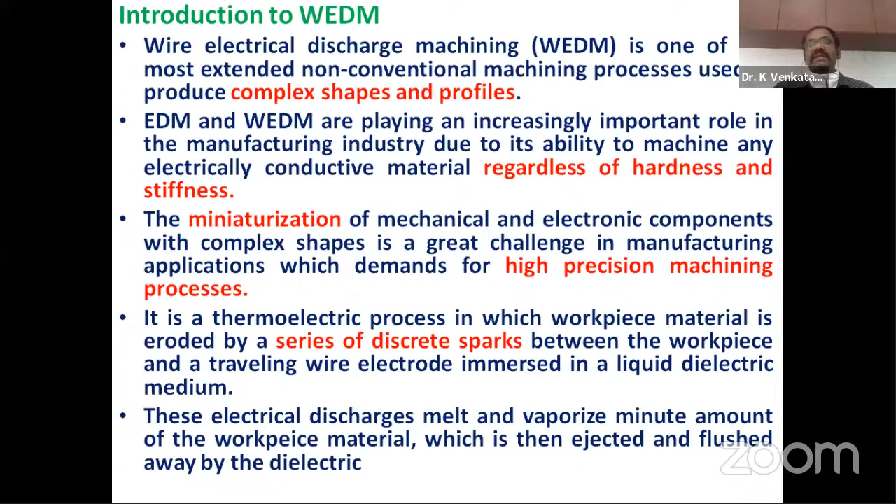Here you can see the workpiece is held on the CNC table. Generally, wire EDM is performed on CNC machines where the workpiece, that is the work plate, is moved in X and Y direction as per requirements by the CNC machine.

The table can be moved in X and Y direction as per the profile of cut we want to make. During the machining process, according to the specifications and dimensions of the profile, the CNC program will be written, and the table is moved with respect to the wire as per the program.

Bottom is called as take up roller.

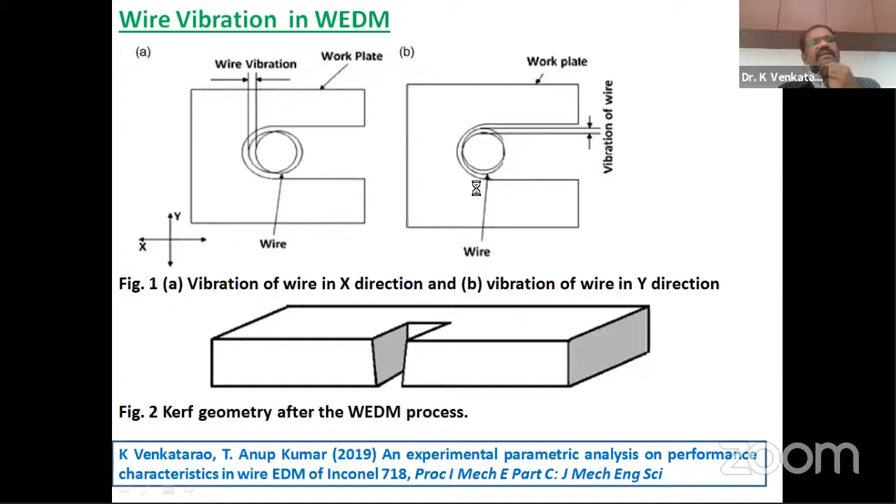Wire tension is a very important thing. As I told you in this slide, vibration of wire in the x direction promotes the metal removal rate, while vibration in the y direction changes the kerf width and affects the surface roughness. To reduce wire vibration in the y direction, if you increase the wire tension, the vibration amplitude, the displacement of wire, can be controlled in both x and y directions.

But the thing is, in wire EDM the diameter of the wire is around less than 0.5 mm. Sometimes, in the present study, we used a diameter of around 0.3 mm, that is almost 300 microns. You cannot even physically see that wire, that is the diameter of the wire we are using. The wire tension can be kept up to 18 newtons.

If you give maximum wire tension, when the positive ion strikes the electrode and spark strikes occur, the wire will break. When the wire is cut, the total machining has to be stopped, and again the wire has to be cut and set to the take-up roller. Those are the problems. That's why you have to reduce the wire tension.

If you reduce the wire tension to avoid cutting of wire due to sparks, then there is a tendency of wire displacement. That is the problem. So that is why we model the wire vibration to reduce its effect on the kerf width and the surface roughness.

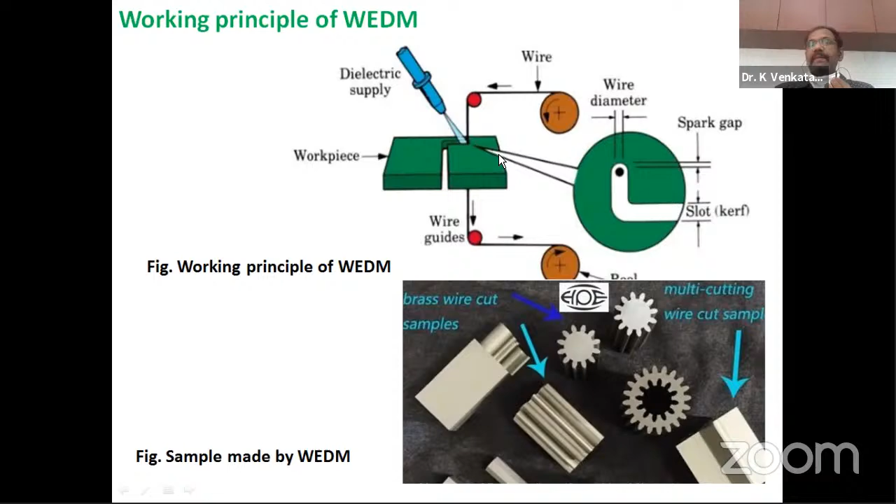Now, to study the effect of wire vibration in x and y direction, first of all we have to measure the displacement. I request all participants to please listen carefully from now onwards. It is required to study the effect of wire vibration on the kerf width and surface roughness, so we have to measure the wire displacement in x and y direction.

So in 2016, Habib Samesh and Akira published a paper in the Journal of Material Processing Technology. The reference is mentioned in the slide. They made an attempt to measure the displacement of wire along with frequency in x and y direction, using a digital high-speed video camera, model Keyence VW-6000.

They used this camera to measure the vibration of wire in x and y direction. A camera we generally use captures 23 to 26 frames per second, but this video camera is able to capture 8,000 to 23,000 frames per second. That camera is able to capture the wire, and its cost is around 18 to 22 lakhs.

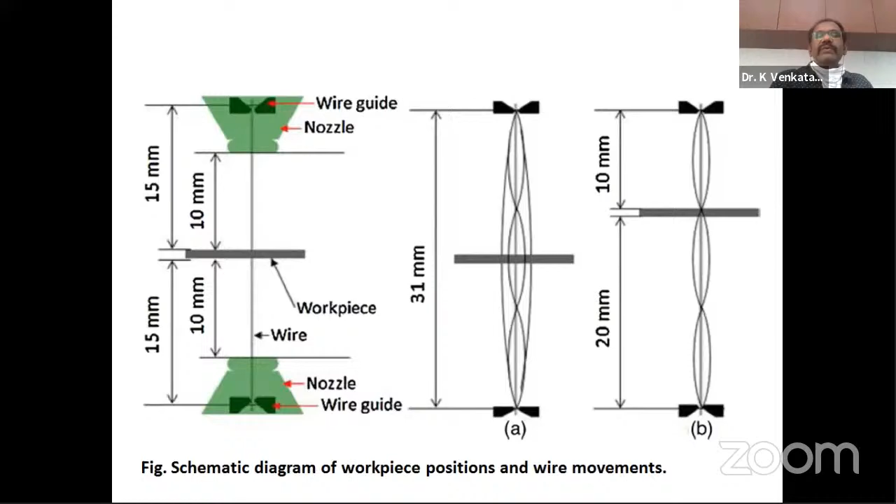With respect to time, we get synchronized results of the wire vibration in X and Y direction. Now it is possible to use this data to analyze the effect of wire vibration on kerf width and surface roughness. Before using that vibration data, let us see the modeling of the kerf width and surface roughness.

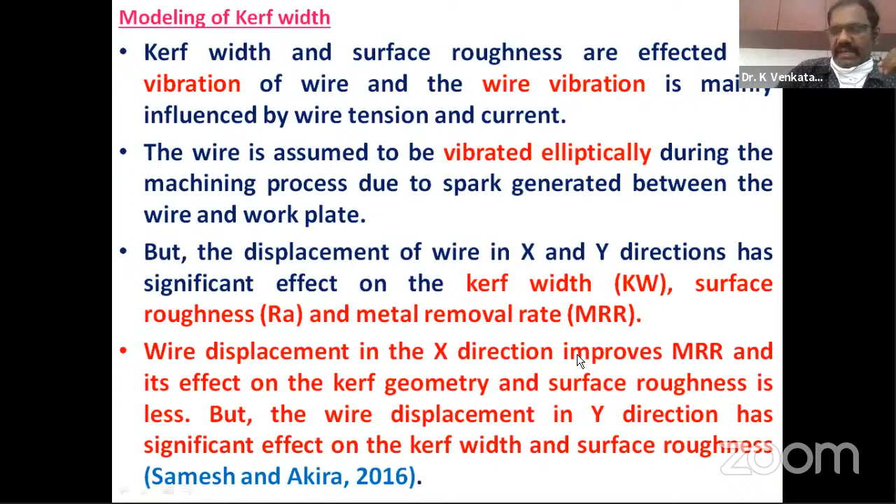We know it follows an elliptical path, not a circular path. In elliptical path, the wire vibrates. That I will show in the next slide, how it vibrates in the elliptical path. The displacement of wire in X and Y direction has a significant effect, as already told. Displacement is nothing but the amplitude of wire vibration. In X direction it promotes more metal removal rate, but its effect on kerf geometry and surface roughness is less. The wire displacement in Y direction has significant effect on kerf width and surface roughness.

Now if we see where that is, we can measure the displacement of wire in X and Y direction using the accelerometer. So not only the displacement of wire vibration, but that accelerometer also measures the frequency of wire vibration and the amplitude of wire vibration. With what frequency it is vibrating in X as well as Y direction, the data can be collected with the help of the accelerometer.

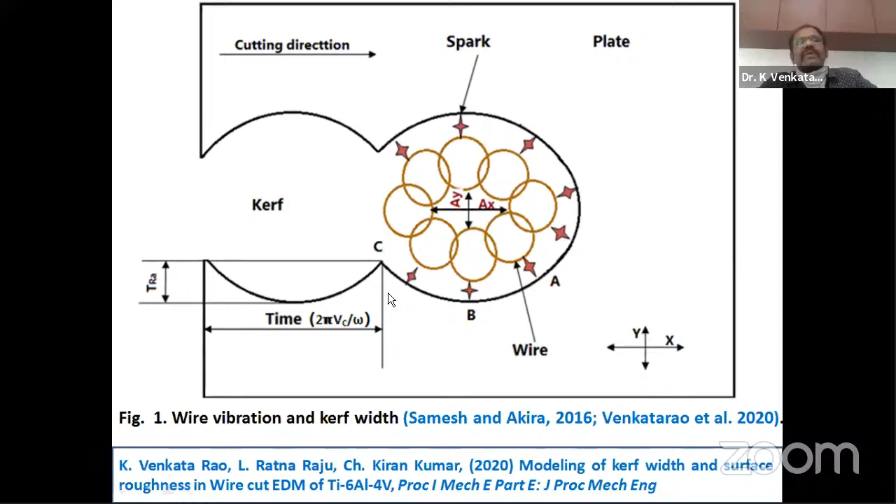Now you see the modeling of kerf width. In the before slide also, we are showing A, B, C. So that wire is vibrating in this direction, moving from A to C through B. That is what we have to assume, that in an elliptical direction it is vibrating. That is why it is moving from A to C through B.

As the wire is assumed to vibrate elliptically during the machining process, the surface roughness and kerf width are modeled using the amplitude and frequency of wire vibration in X and Y direction. The workpiece is fed against the wire electrode, and the wire starts machining at point A to point C through point B.

So the thing is, at A you have the maximum height of the kerf, and at C also you have the maximum height of the kerf. We want to find out the time between A and C. If you are able to estimate the time instants at A and C, then you can model the kerf width and surface roughness using the vibration of wire in X and Y direction.

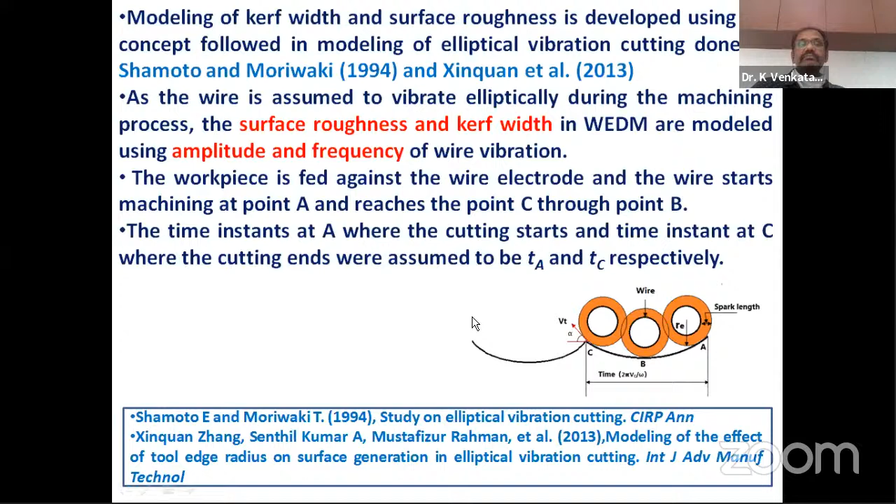So in the next slide, you see this. Here, AX is the amplitude of wire vibration in X direction, AY is the amplitude of wire vibration in Y direction, and the position of wire during the machining process, in terms of X coordinate and Y coordinate, can be modeled at a particular time instant.

Xt is equal to AX into cos omega t minus VC t. VC is the cutting velocity during the machining process. Nowadays we have all CNC machines, and on the display you will get the value of VC. There is no problem with the cutting velocity; on the display you can directly record the cutting velocity during the wire EDM process.

So now with the accelerometer, we can measure the wire vibration in X and Y direction in terms of amplitude and frequency. Using that frequency in equation number 3, you can find out omega using the frequency of wire vibration. Then we can model the position of wire in X and Y direction.

In the next slide, we see velocity of wire; we should know the velocity of wire, then only it is possible to model this. The velocity of wire in X and Y direction can be obtained by differentiating the previous equations 1 and 2. Then the transient velocity in X and Y direction can also be estimated using equations 4 and 5.

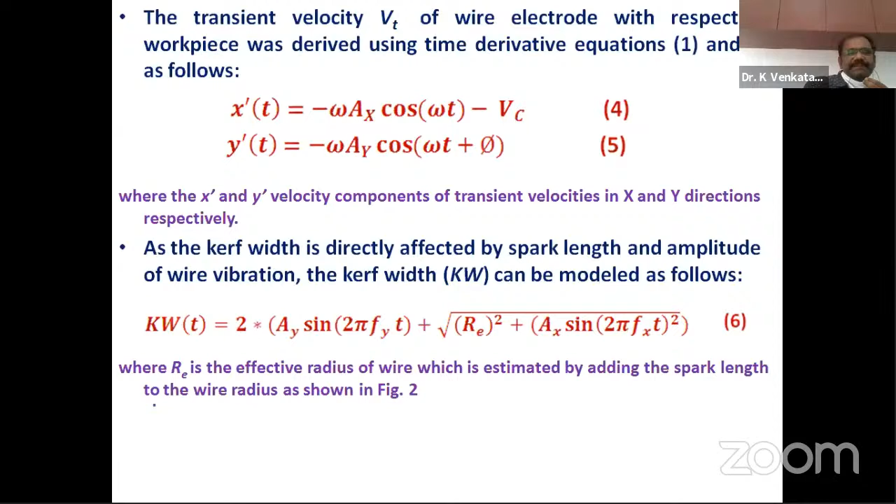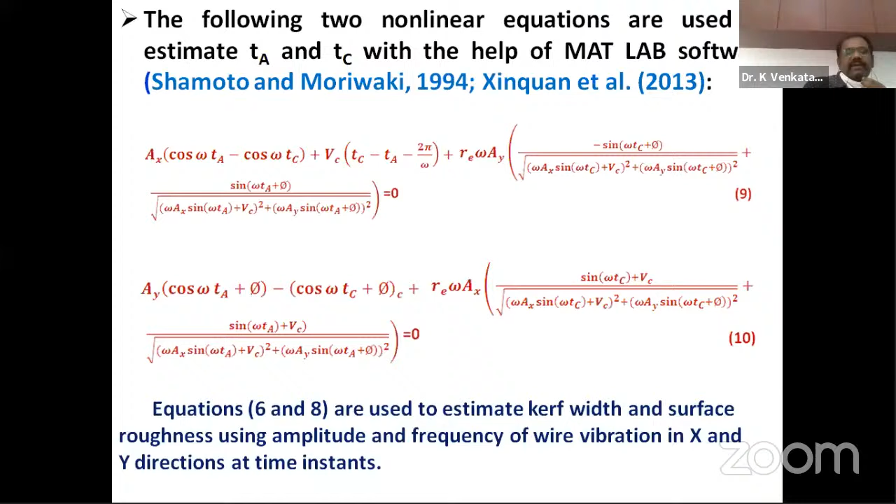Using TA and TC, the theoretical roughness and the theoretical kerf width, both things at a particular time instant, can be estimated. This is called modeling. In modeling, we can estimate or predict the kerf width and the surface roughness. Like that, we can estimate kerf width and surface roughness using the experimental data of wire vibration, that is amplitude and frequency of wire vibration in X and Y directions.

This is the experimental setup already explained. Next, the experiments conducted at different parameters: the workpiece material, wire material, distance of wire guides from the plates, above the plate 100, below the plate 100. The plate thickness is 5 mm, total gap is 205 between the two guides, that is the total length of wire. Deionized water is used as dielectric fluid.

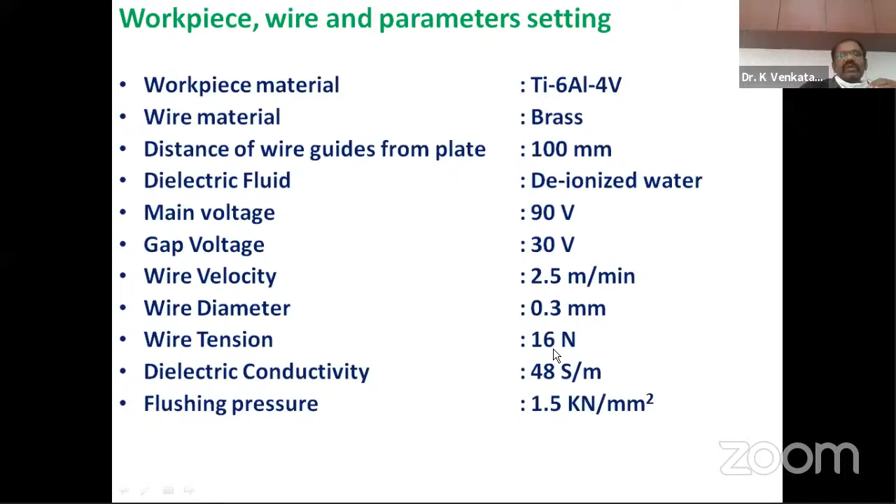Voltage is taken as main voltage 90 volts, gap voltage 30 volts. Wire velocity, wire diameter 0.3 mm. Here we took the wire tension as 16 newtons. All these are the parameter setup.

At different working conditions, these are the experiments we conducted. These are 4 input parameters we have taken: current I, wire tension, T-on, T-off. This is the output value we can directly record from the machine using the thickness of wire and current, thickness of the plate and cutting rate. We can estimate the metal removal rate. AX, FX, AY are measured using the accelerometer.

Kerf width is predicted using the equations we developed in the study. RA is also predicted using the model we developed. Experimentally, under the machine vision system, we measured the kerf width and roughness simultaneously. When comparing these two, both were found to be very close together.

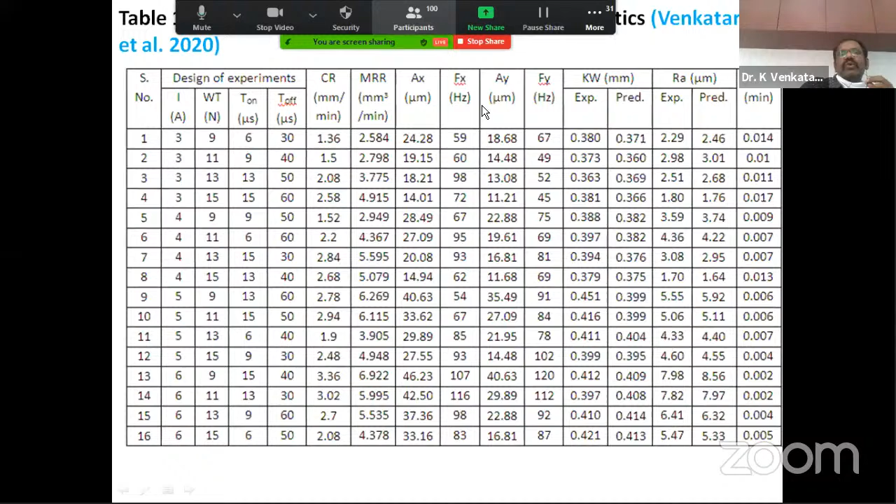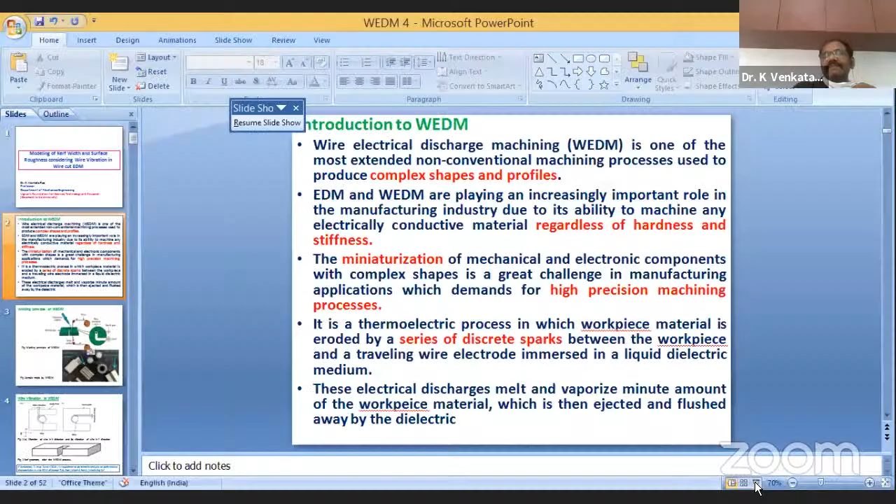This TA value is obtained using the equations shown just before. Using equations 9 and 10, we can estimate the TA and TC values.

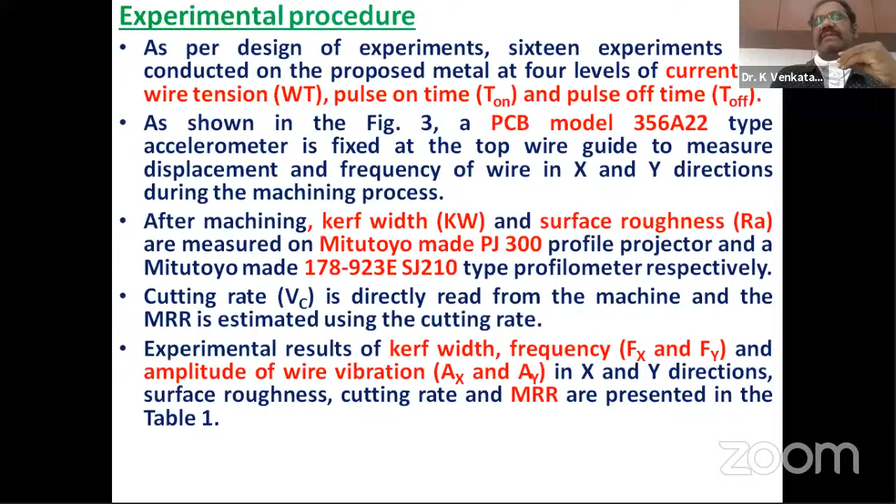Now this is the variation of wire measurement in X and Y direction. In X direction, the maximum amplitude is 24.28 micrometers with a frequency of 59 Hz. In Y direction, the maximum amplitude is 18.68 micrometers with a frequency of 67 Hz. So this shows the measurement of wire vibration in X and Y direction directly.

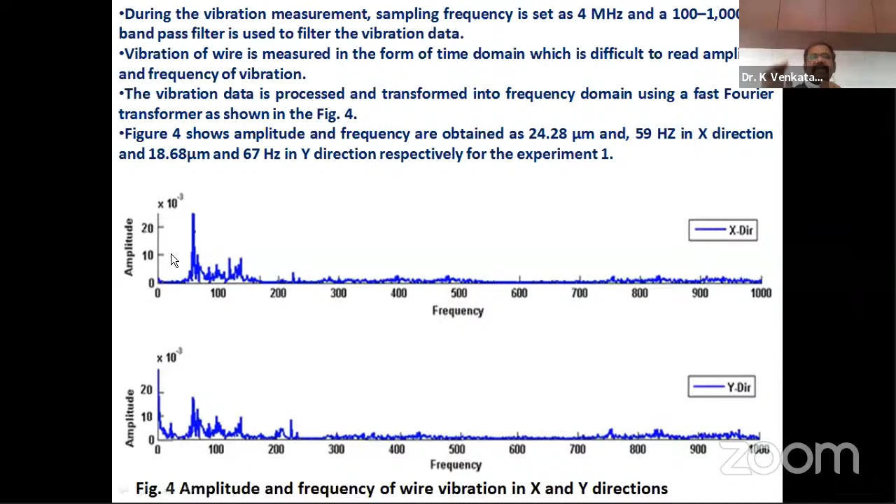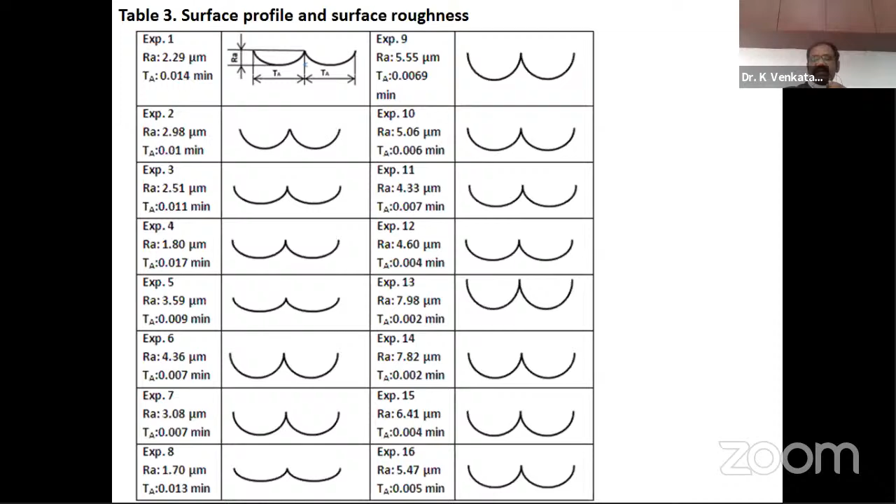Current and wire tension have 74% and 23% contribution respectively on the displacement of wire vibration in X direction. In Y direction, both current and wire tension contribute, but wire tension has more influence than current on the wire displacement in Y direction.

That's why we want to optimize the process parameters to reduce the amplitude of wire vibration in X as well as Y directions. So now we have almost completed the mathematical modeling. Now we go for the optimization.

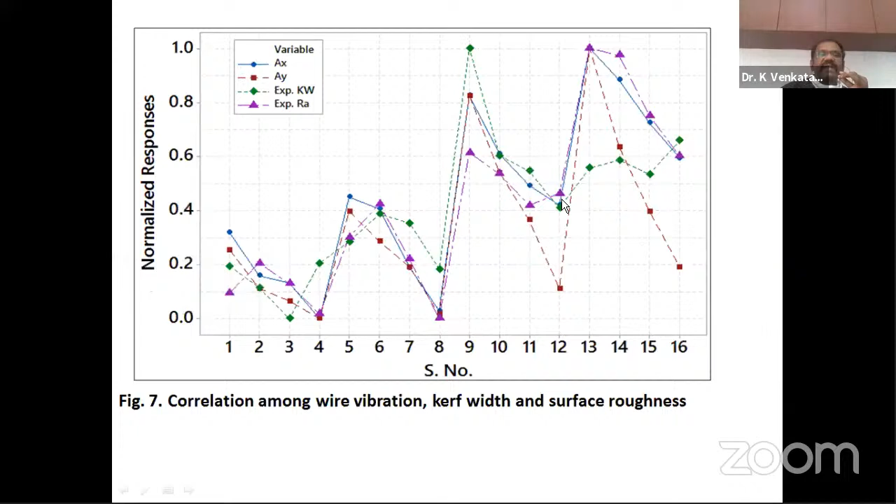There are different types of optimization techniques, like the Taguchi method, which everybody knows. Next is response surface methodology, gray relation analysis, particle swarm optimization, teaching learning based optimization, graph theory matrix approach, and utility concept. Now this is very important.

All participants are requested to listen carefully about the advantages and limitations. First I am talking about the limitations in all the methods, so we can select one method as per our requirements. First let us see the Taguchi method.

In the Taguchi method, design of experiments can be carried out, and the Taguchi method estimates the signal to noise ratio for all the output characteristics. Signal represents the required value, noise represents the unwanted value. When the signal to noise ratio is more, the unwanted value is less, and the results will be good.

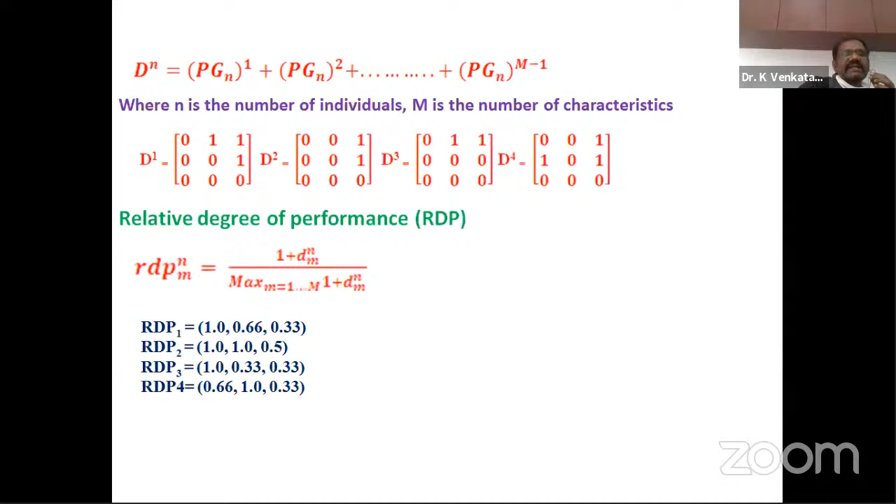This one: 0.66 plus 1 plus 0.33 plus 1, this one is 2.99. So 2.99 by maximum value 3.66. If you add all these things, you will get 1, comma 0.8169, comma 0.4071. So this value we get from this one.

Weights are to be estimated. So in the estimation of weights, first you have to add these 3, so one value will get, that is 2 point something value will come. 1 divided by that value, you will get 0.449, and this divided by sum of these 3, you will get this one.

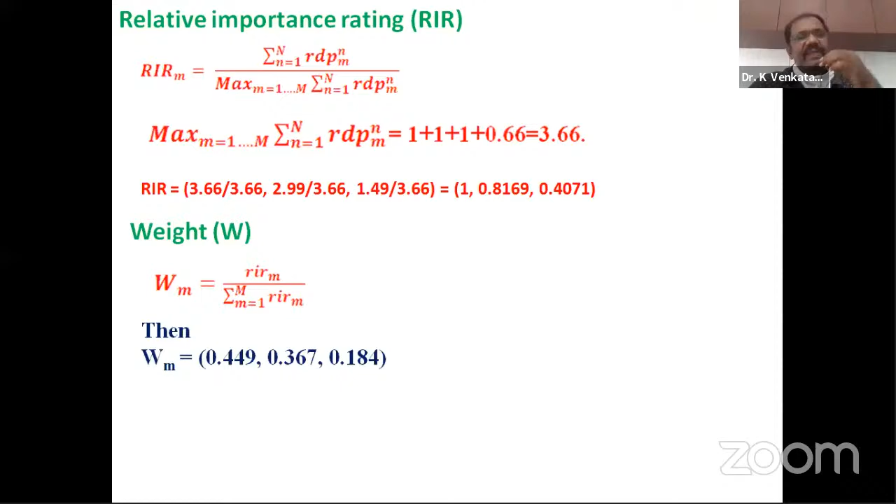So like that, scientifically we can estimate the weight of responses. If you see the RSM method, it is not possible to give weights there, so all the 3 responses will be given 0.33, 0.33, 0.33. Like that it gives the weightage there. In this method, we can estimate the weights scientifically. Weights of responses are estimated scientifically.

How to get the multi responses into one response? Generally here we have the CR, AX, AY, these are the 3 responses. 3 responses are to be converted into one response. So how to convert that one into one response, I will show here. See this one, overall utility value, it is nothing but the 3 responses converted into one response, that is called the utility value or maximum response.

See this one, weight of AX, weight of CR, weight of AY. So this one is PAX, this is preference scale, again we have to estimate. This PAX is preference scale, this one also preference scale for the CR, this one is preference scale for the AY. Here you need not worry how to estimate the preference scale easily, I will tell you, please listen to me.

Now you come here. So this one is construction of preference scale, where we have the 3 responses AX, CR, AY, and for this we have the Taguchi method. Using the Taguchi method, AX you have to select as larger the better. All of you know the Taguchi method, I think most of you know. Using the Taguchi larger-the-better method, because AX and CR have to be maximized.

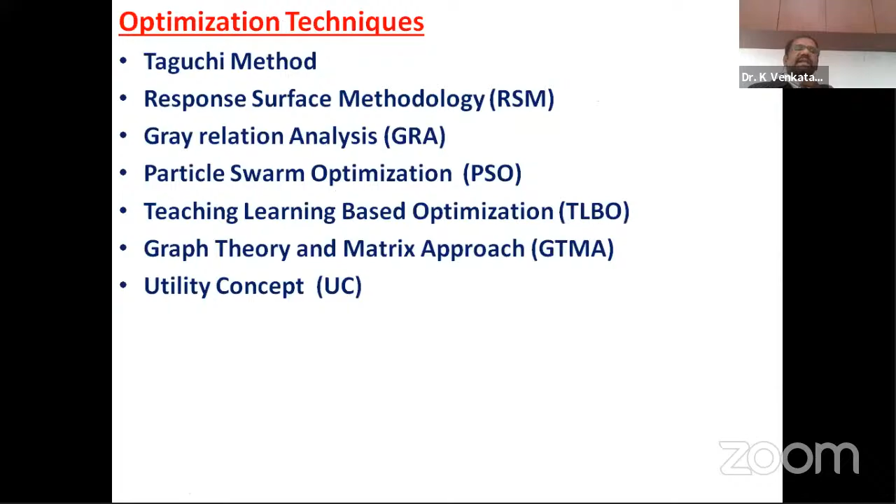Now, if you go to the experimental results, in the present study we have taken CR, AX and AY. We want to maximize CR and AX, and minimize AY - that is the aim of our study. These values, clearly see these values we are using.

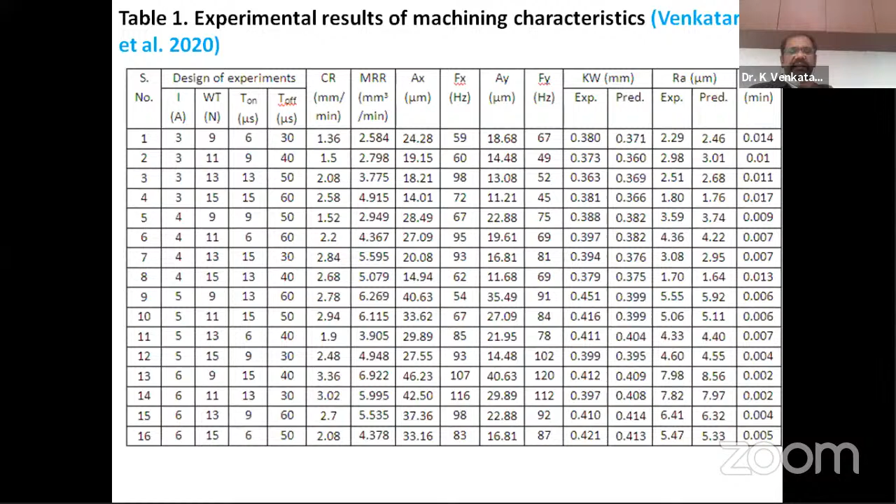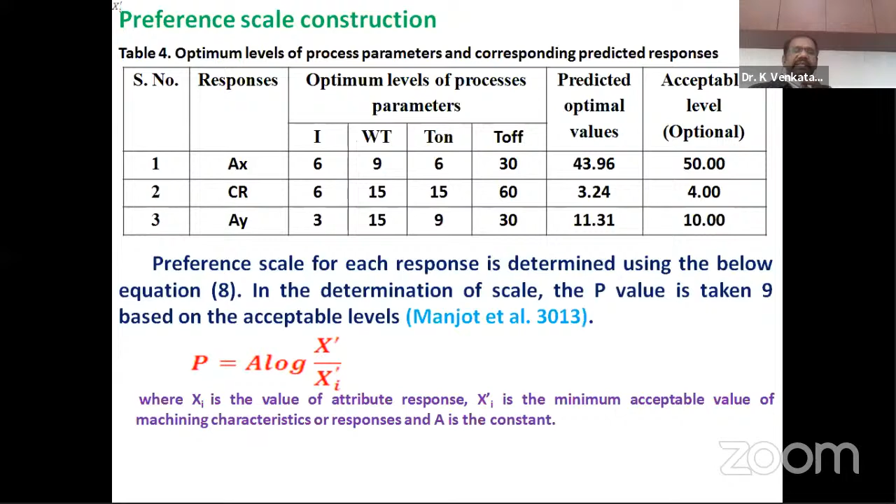How many experiments did we conduct here? 16 experiments we have conducted. How to estimate that utility value, I will tell now. Listen carefully - so far I think there is no problem for you to understand. Now see this, overall utility value.

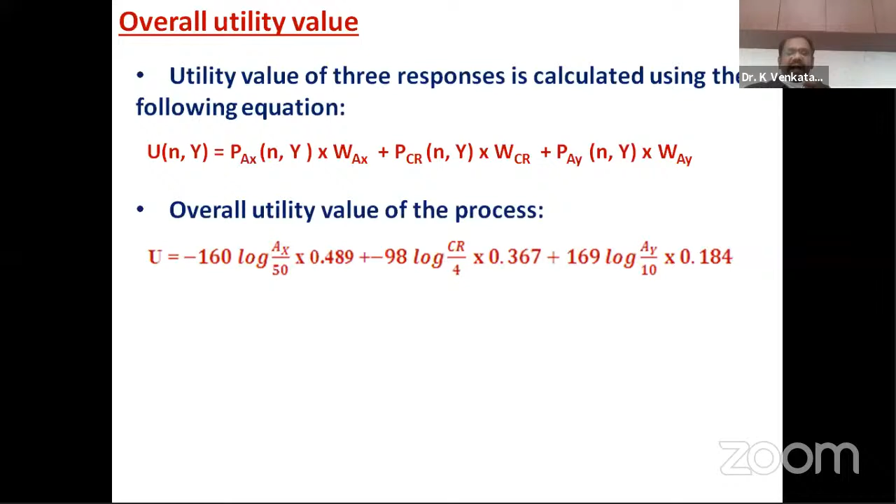That means the three responses are combined and converted into one response as utility value. See this, W - these weights we have obtained using the GTMA method. All the weights are taken, and preference scales also, just before this slide we constructed. See this, AX, CR, AY - where you have 16 experiments, in each experiment you have separate AX, CR and AY values. Those values will be taken, and finally you will get the utility value. See this, on the right side you have a column, the utility value taking the three responses.

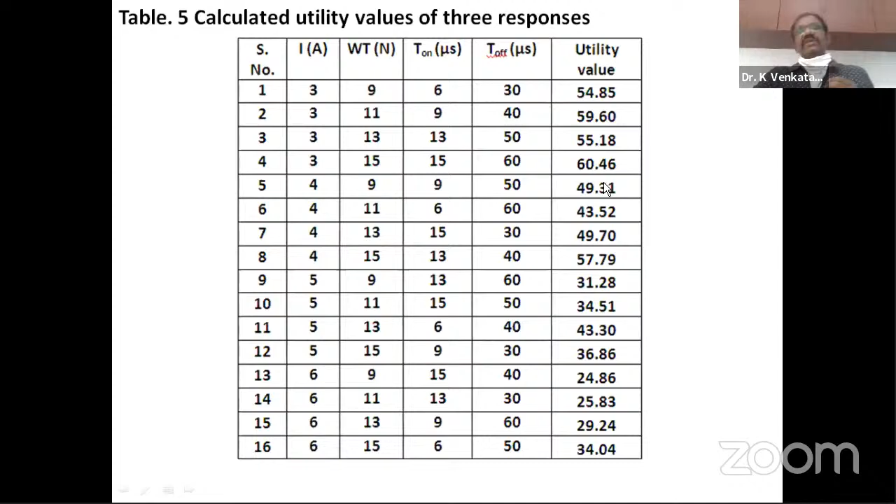So using these utility values, the process parameters are optimized. So we get optimum current that is 3.697, wire tension is 15, 7.6364 is the T-on optimum value, and T-off is 60. So we optimized the process parameters here - that is 3.697 current, wire tension, T-on and T-off. So we optimize the process parameters.

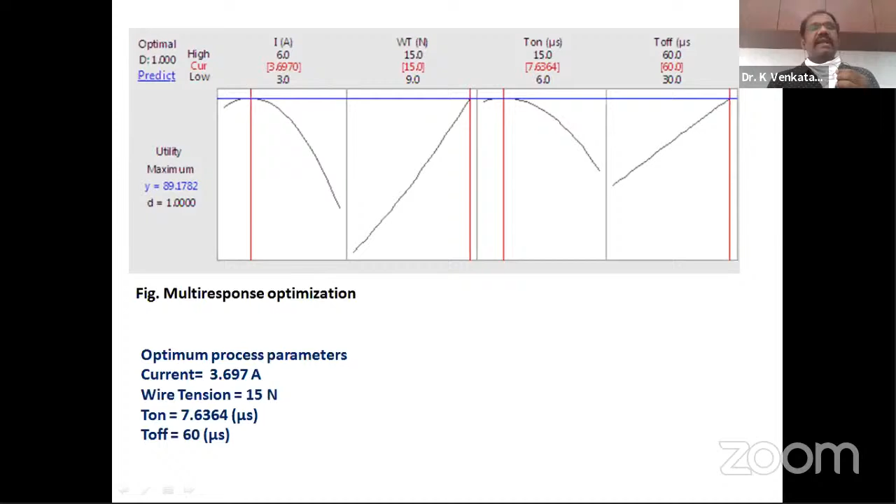After that, we have to validate that using the neural network method. Okay, I don't want to take much time here. Most of you have heard about the artificial neural network, but you are unable to use this. I will tell you an easy method on how to use ANN for our research work.

Generally, we are using MATLAB to carry out the artificial neural network. So in this presentation, I used EasyNN Plus software - that is very easy to use. That software size is also around less than 50 MB. On the internet you can download it for free, maybe for 45 days it will work. You can easily download that, and it's easy to use. Artificial neural network is one kind of modeling technique using experimental data which is already collected.

So we have different types of modeling techniques. One is mathematical modeling. In this presentation, first we have seen what that is, where mechanistic models are used, which are nothing but semi-analytical methods. Using that modeling technique, we predicted the cutting force and surface roughness.

So the next one is the finite element based, FEM based modeling technique. FEM based modeling techniques are physics equations based modeling techniques.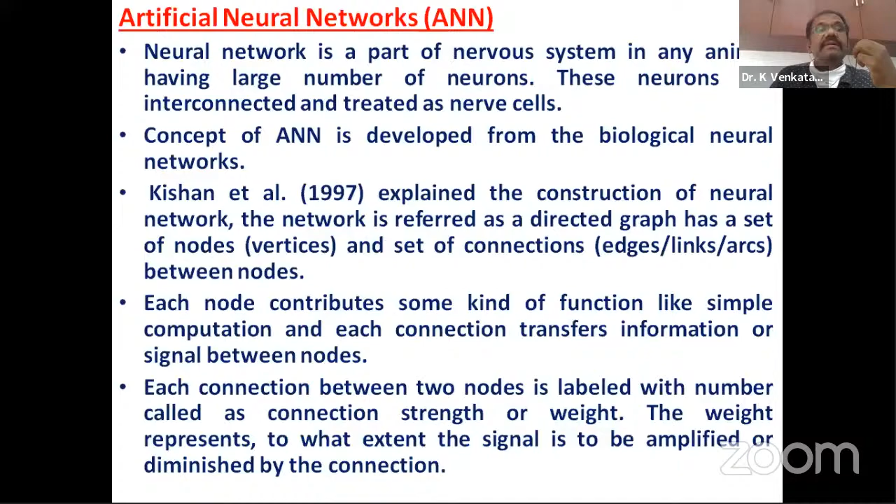Now in the present study, we used a feed forward 4-10-3 network, that already I explained. Learning, how it will take place, I will show. There are 3 types of learning methods.

One is supervised learning, unsupervised learning, and reinforcement learning techniques. I will tell now, once again I am coming here. We have a set of data for 16 experiments at different levels of current, wire tension, pulse on time, pulse off time, and we collected the experimental results CR, AX, and AY. In this presentation I took only 3 responses. Actually we have 6, so among the 6, I took only 3 important output characteristics here.

Now, cutting rate, I already told you, in that preference scale construction where we have taken 4. This network is trained with that table, the experiment results table. The table consists of inputs as well as the outputs. The total data will be given to this network, and this network estimates, predicts the CR, AX, and AY also.

So if you see the supervised learning, we gave the target for CR as 4, that is cutting rate 4 meters per minute. For AX we gave around 50, for AY we gave 10 micrometers. Like that, these values we have taken as targets in the GTMA method. Similarly, the targets we have taken here for CR as 4 meters per minute, AX and AY as 50 and 10 micrometers respectively. We gave the data to this one.

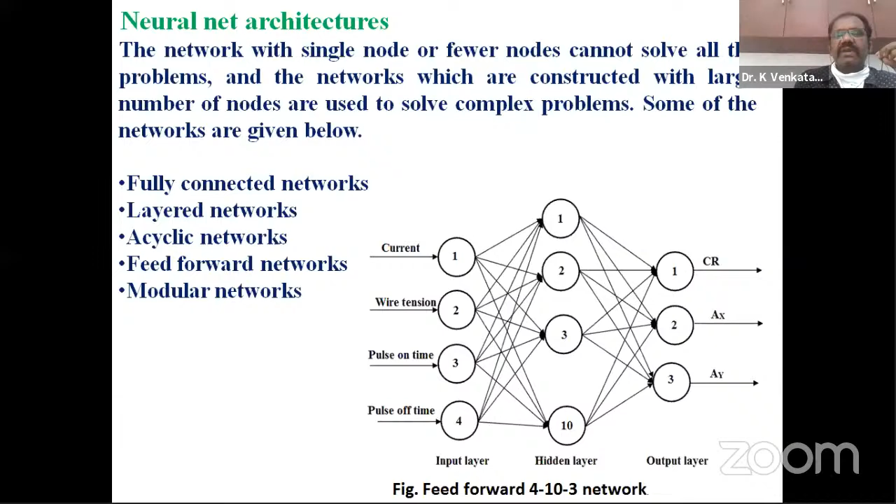Now, how to create the network, how to give the input values, how to run this network, and how to predict using it — all these things I will show in the coming slides.

See this software, how to enter the data there. This software is easy, and everybody can download it from the net. The trial version is available for 45 days. If you download and open that software, you will get this kind of display.

Initially you don't have this kind of number of columns or rows; at the start it gives only one row and one column. If you click here, you can increase the number of columns and rows, it doesn't matter — as per your table, you create the number of rows and columns.

Along with the software, you can download the manual also. In the manual, it clearly explains how to increase the number of columns and rows. After getting the required number of rows and columns, you go to each box, select it, and enter the value, or otherwise you can import the data from the desktop.

If you import the data, after importing you have to specify each column. See this one: WT, Ton, Toff, and the current is also there, though current is not visible here. We have to define each column as whether it is input or output. At the bottom you have options for input, output, and exclude.

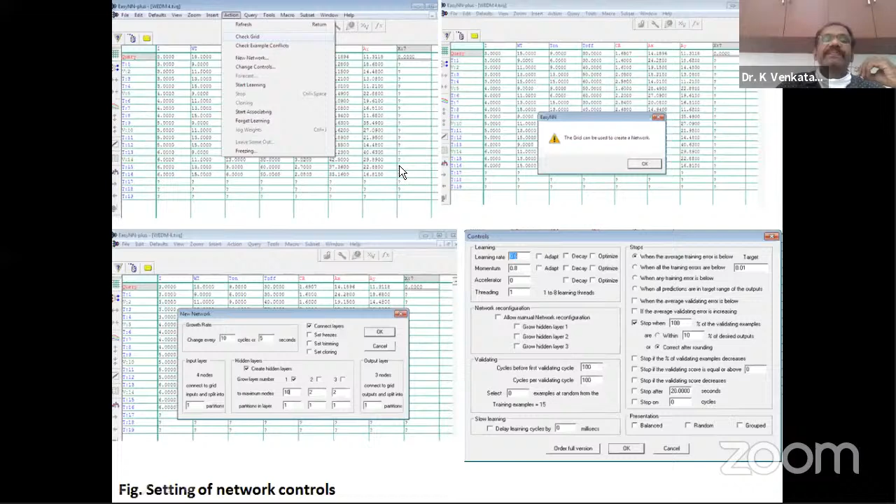See this one, like that you will get it. If you go to the query, this will be displayed. If you give the input values, it predicts the output values. So for testing this, I separately conducted 3 experiments and compared the predicted values with the experimental values. All the things we got error less than 5%.

And see this one at the bottom - the optimization which is done by the GTMA method is validated with this ANN method. All the predicted values are found to be close to the experimental results. Then the optimization is also validated. That validation is also optimized.

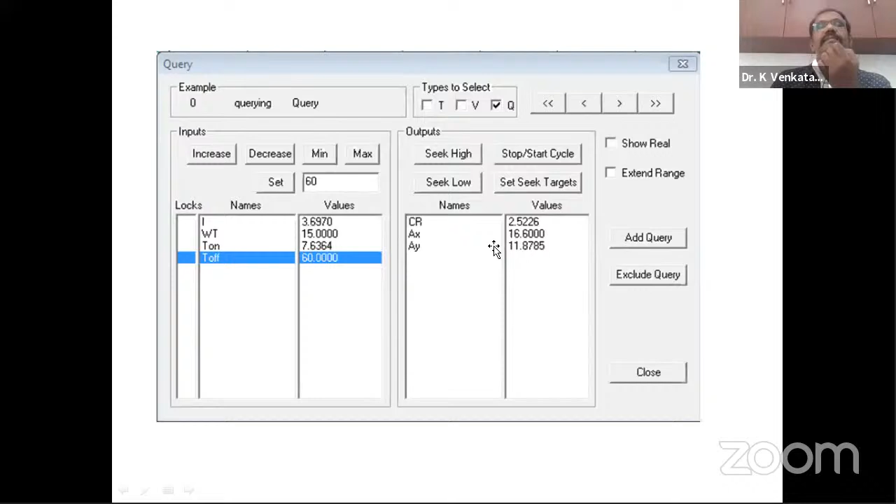Sir, can you tell us the name of the software? EasyNN-plus. It is very easy. That question is from Arshad Mahmood.

One more question, sir, from Benjamuri Venkata Kamesh. Can you please tell about why the last row of the PG1 matrix becomes 0?

You see, to get one value, there must be a connection from one response to another response. Between them, if there is any other circle or response, it will take 0. There must be a direct arrow from one response to another response. If you don't have the direct arrow, automatically it takes 0. Based on the arrow, for suppose from CR to AX, if you have an arrow, it will give 1. From CR to AY, if you don't have the upward arrow, it is taken as 0. Based on the preference graph we constructed, we get the 0 or 1 value.

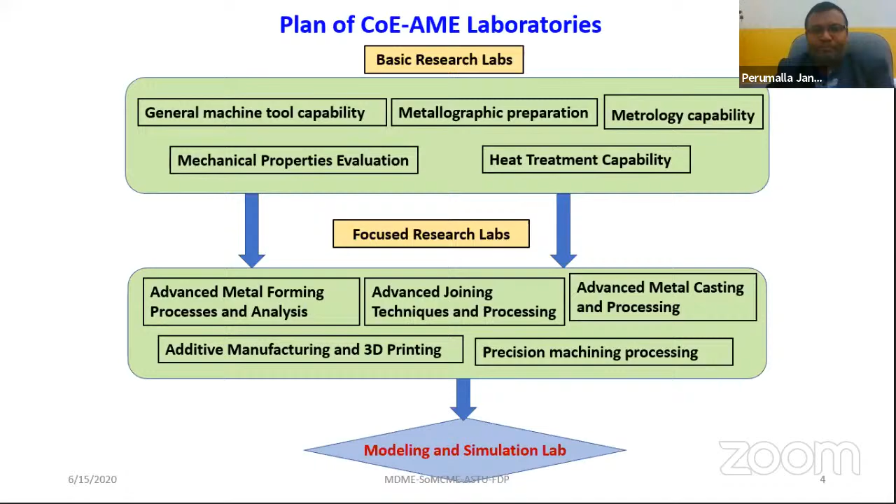When I'm coming to my presentation, I may speak about a brief introduction on the welding process, how the welding process has come, and what makes welding an advanced level of technology, and what types of welding processes we have, and possible forces in the process, and the mathematical significance in the process, how mathematical modeling can be done for the welding process can be seen.

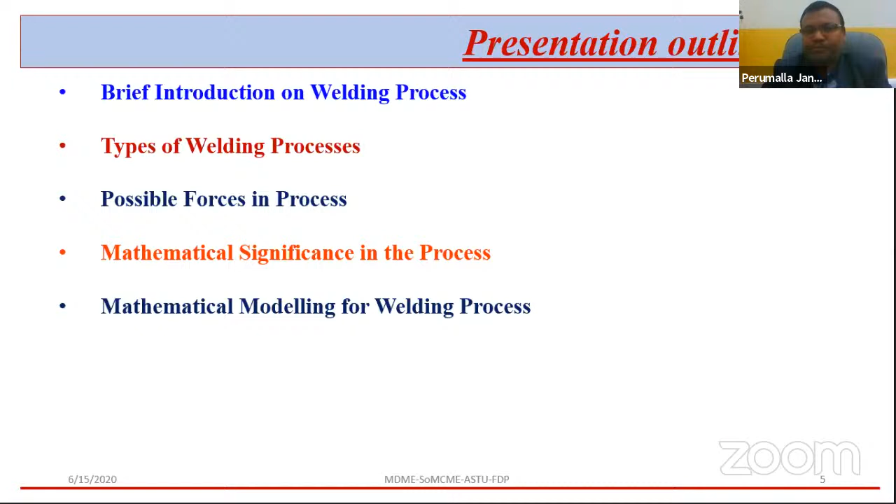Also with respect to the workpiece material, what workpiece material you are working on, what type of equipment you are using, what type of work zone you are working in, what type of interface you are maintaining, and what type of tool we are using. Based on that, and also based on different new materials, the entire manufacturing classification can take place with respect to the materials, with respect to the physics, with respect to the tooling aspect.

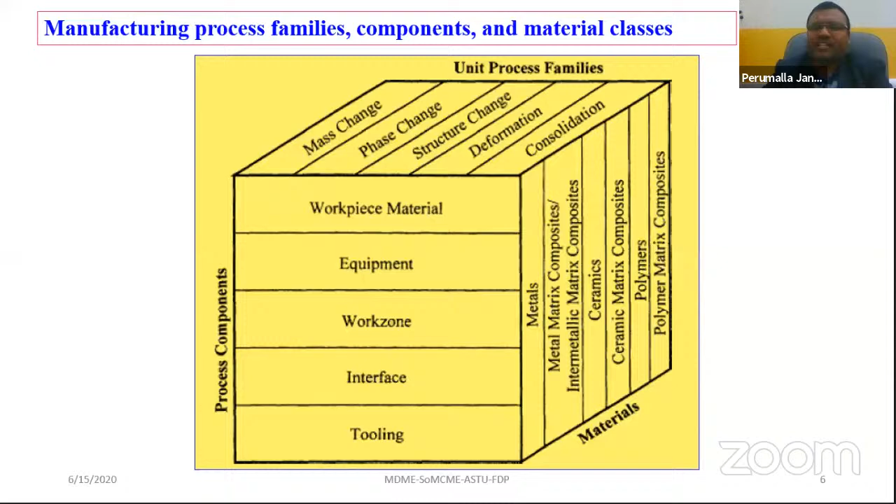We can classify the process. So the origin, when you talk about manufacturing, how that idea has come and how this manufacturing process has been classified - if you go and see our mythology, Kamadhenu, manufacturing is like a mother for all the products, where all gods and goddesses exist on Kamadhenu. We believe Kamadhenu is like an idea, a base for the manufacturing aspect, and how we have derived our manufacturing products with respect to our mythology. If you follow our mythology, you will get so many ideas for research, work in such a manner that you will not deviate from anything, and you will move further into pinnacle positions.

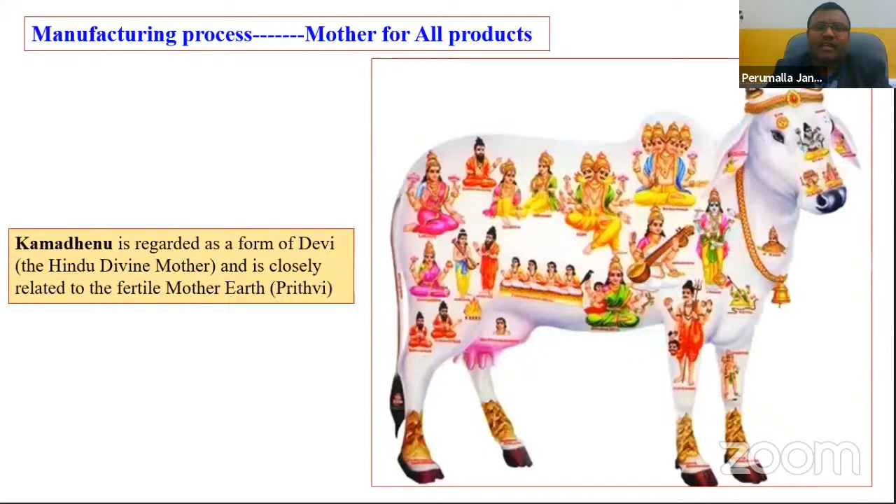When it comes to the introduction of welding, it actually started as a metal manufacturing process. Metal working is the first process - metal forming, you could say, started 8000 BC back. When it comes to the welding aspect, it began at 4000 BC. Then it started with 4000 BC and moved further, became very popular, and it took so many years to reach the advanced level of the process.

No need of studying all the stories here. It was started from 4000 BC, and it is still going on - you can see how welding has impacted the various stages of the manufacturing process. Without the welding process, joining different kinds of materials with respect to thickness and material aspects would not be possible. There are so many possibilities to make the weld workable, and it is done in a systematic manner, giving very good efficiency with respect to performance.

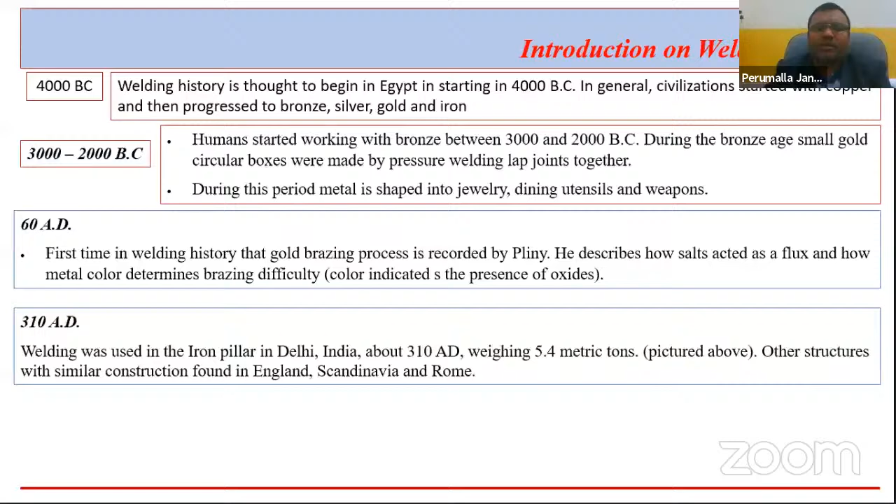When you talk about classification, how can welding be classified? For any engineering subject, we need to recollect our physics principles and see on what basis weldings can be classified, on what basis weldings can be done, and what materials can be welded. If you talk in that way, welding broadly has 4 classifications.

These 4 classifications cover the entire welding process. For example: welding with or without filler material, source of energy for welding - whether you are using filler material or not, arc and non-arc welding process, and fusion and pressure welding process. Based on these four phenomena, welding processes have been classified, and now there exist so many processes in welding with respect to the material aspect.

When you go for large melt pool welding processes, you can see how expensive the welding process is and how much energy is consumed to join the materials. We can talk about tungsten inert gas welding - how much energy we are giving and how much melting we are generating during the process, how large the melt pool is. Similarly, manual metal arc welding will also create a huge, large molten melt pool zone. Submerged arc welding and metal inert gas welding are similar.

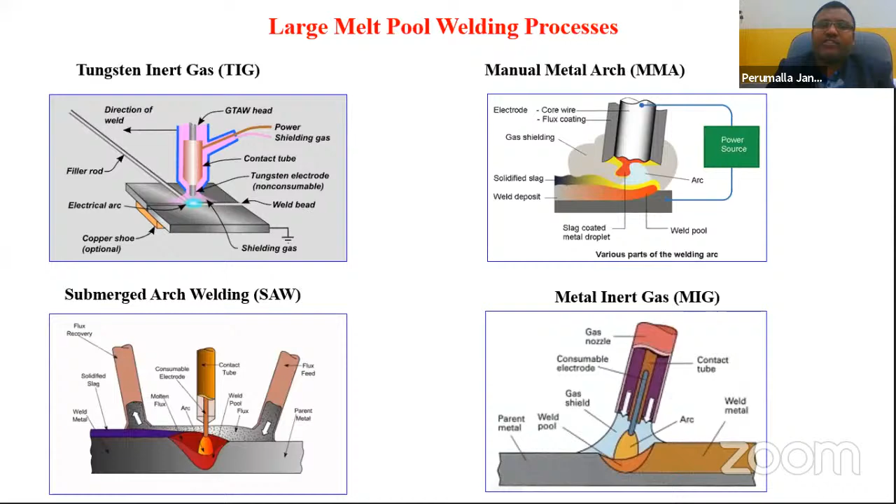Based on this, that's how the evolutions will come into our mind. When large melt-pool welding processes already exist, why not go for narrow weld-pool processes? Obviously this question will come. When it comes to narrow processes, there's advanced technology already working in the field.

When it comes to the narrow aspect, there's the laser welding process and the electron beam welding process. These look very simple, but when it comes to process optimization - the process parameters involved during joining of different materials, how it can be worked out and processed, how we can utilize proper parameters, minimize energy consumption, and achieve perfect joints - this is what you see: melting of the material and joining the material.

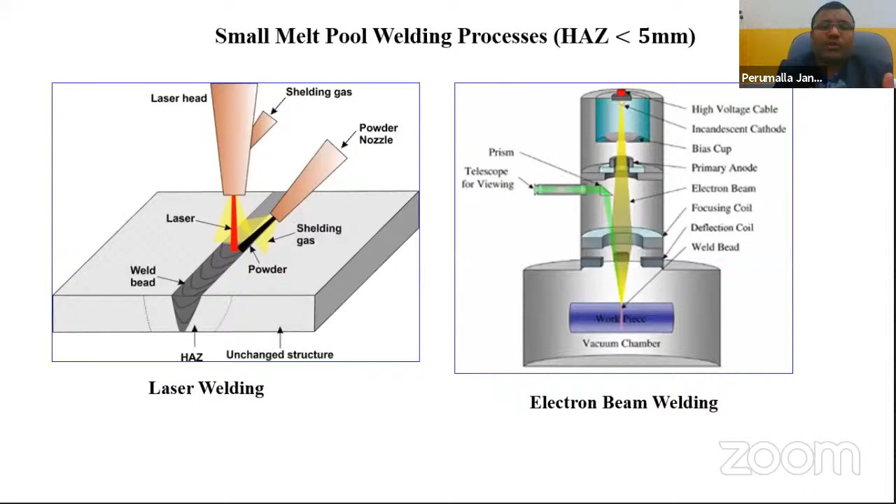So you may think, why don't you join materials without any melting point? Is it possible? Such questions will come. With these questions, enhancement of the process will be implemented. It may seem like a layman's question, but the layman may ask such doubts.

When going for the process, we need to see how the material is depositing on the other material or the filler material on the proposed joint. So how many forces are involved during the process? Significantly, there are two things we need to observe.

That is: flight duration of the molten metal drop in the arc region affects the quality of the weld metal and element transfer efficiency. This itself could be a research topic - flight duration of molten metal drop in the arc region affects the quality of the weld metal and element transfer efficiency.

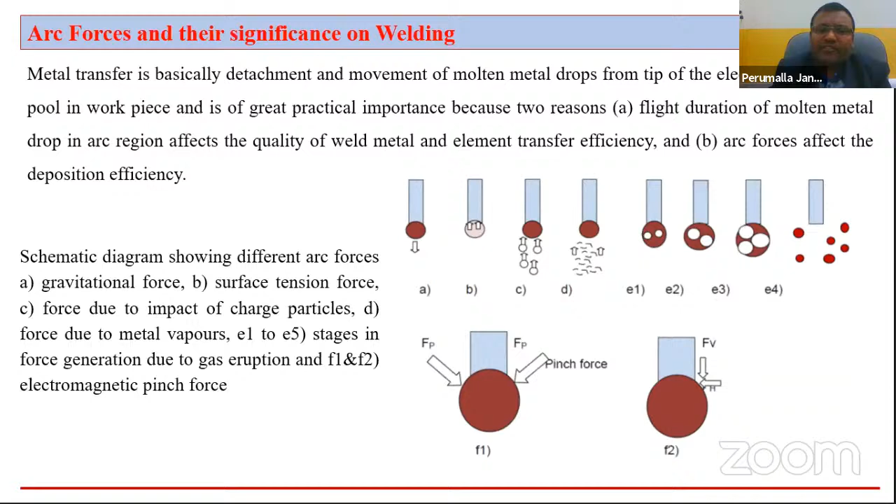We've already discussed melting the material and joining different materials. Why not avoid any melting zone? For that, solid state technology has come about - solid state joinings have come to make welds without any melting of the materials.

For that, there's cold welding, roll welding, explosive welding process, and ultrasonic welding process - a few processes where we can see how welding can be done without any melting.

But these materials may not work for high thicknesses or different types of materials or high strength materials. In that case, what has to be done? The advancement has to be continuous. So whatever solid state joining techniques we see here, it may not be suitable for different types of materials or different thickness of materials or heterogeneity. When it comes to that, it may not be suitable, so further advancement has to be done.

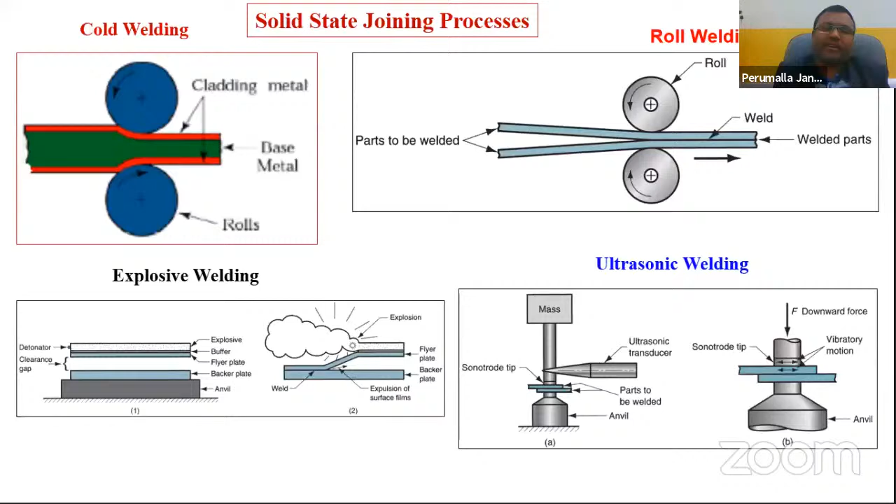For that advancement, it is classified again into 4 manners: diffusion bonding, plasma assisted diffusion bonding, rotary friction welding, and friction stir welding.

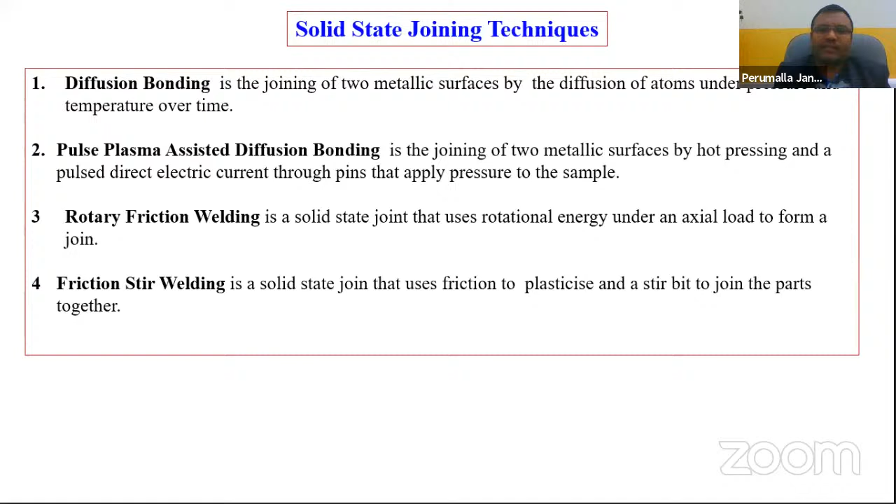In the current scenario, when it comes to diffusion bonding, it talks about the atomic level, how the atoms will dislocate and deform from one material to the other. The diffusion bonding will explain how it can be done.

When it comes to plasma diffusion bonding, the atoms will come out and deposit to other places with the anode and cathode mechanism implemented. Then it will go and weld both materials. By applying huge pressure on that, it will be done.

When it comes to rotary friction welding, this is a highly solid state welding process, where by rotating the two things we generate pressure over that, and the welding joint formation will be done.

When it comes to friction stir welding, it is the most advanced welding process so far till date, and the most popular process, especially for non-ferrous materials. The extension of this friction stir welding, in addition to non-ferrous, now it is welding steel materials and non-ferrous materials, and also non-ferrous to polymer materials are being joined. Such beautification happened in the overall evolution of the welding process.

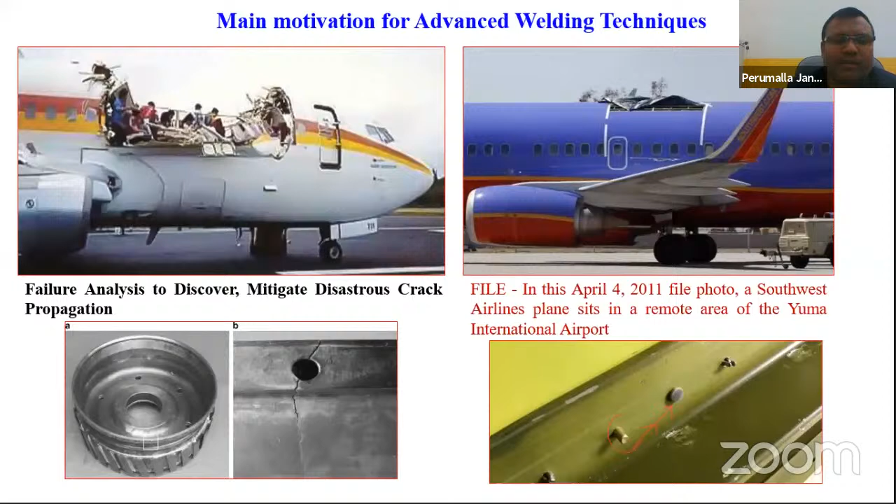So when failures are happening in the structure, especially in aircraft which travel at high velocity, when this type of problem comes, how to avoid it? We cannot go and repair immediately. It is not possible. So similarly, you can also see the motivation, how it is coming.

The motivation aspect: rivets, 3 rivets have been used to join a simple material. Why don't you join it simply with the solid state welding process? If you join them, you can replace the entire thing. Similarly, however many rivets have been used, you can simply replace the thing. And if you want to see a differential example, see how many rivets are used here - simply you are going for welding of the thing, done with laser welding. This is how we can replace the existing technology with the latest joining process.

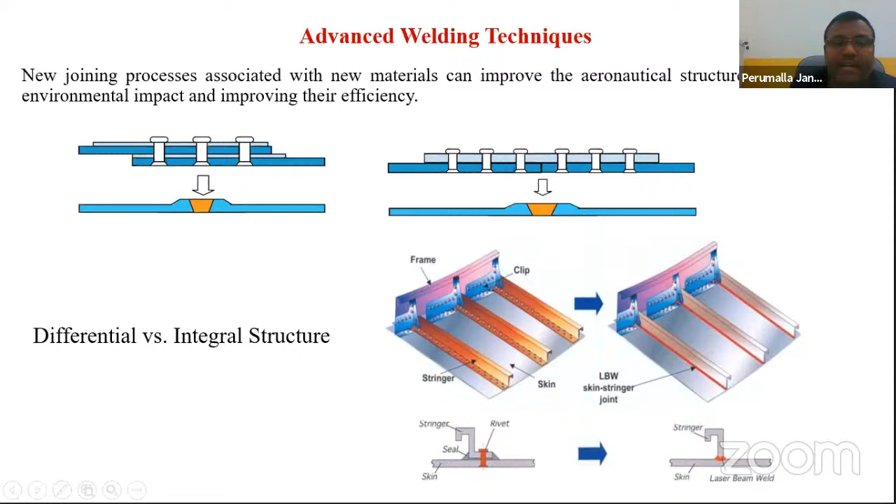When it comes to the significance of the mathematical modeling for any process, for any mathematical model, you must start with a physical system.

From the physical system, you get some ideal system, and from the ideal system only, the process will be done. Up to here, up to this zone, is the ideal system. Then you go for the welding process simply, whatever the process could be.

But when you introduce the mathematical representation of the ideal system, by incorporating the governing equations, problem domain, and boundary conditions, and then go for the welding process, it will give you the proper and perfect solution for any kind of problem. Why do we want to go for the mathematical modeling process? Why don't you use this process directly?

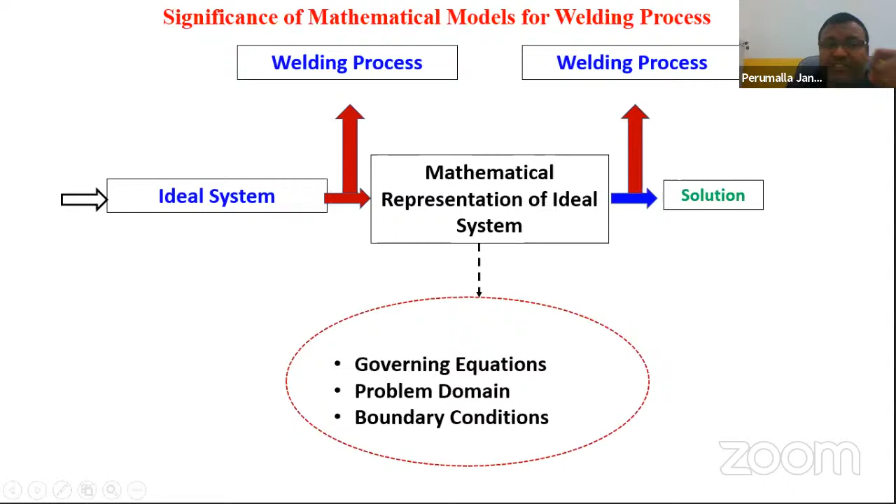People have already studied this. If you see the significant level of how much welding is used in the automotive aspect, take a simple automotive body - by utilizing MAG and TIG welding processes, how many parts have been welded for the automotive body? This is one type of process.

Similarly, if you check other processes like the advanced welding process, such as laser welding, how many parts have been welded?

Even though each welding method has its own defects and problems, if you want to overcome such problems and make a perfect weld for such products, especially in laser welding, there will be a keyhole problem. If you see this diagram, the microstructure aspect when joining materials shows this keyhole problem. You can see here how many processes and parts are generated during welding, how solidification takes place, and how the molten pool is generated during the welding process.

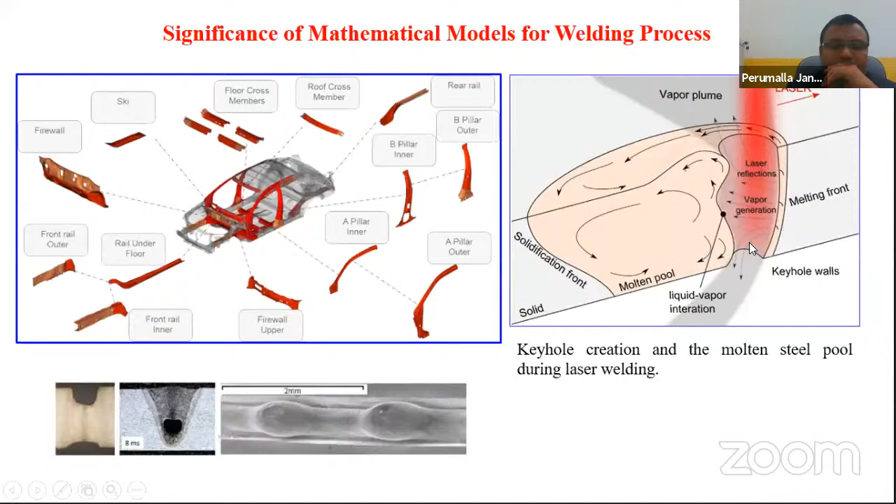Similarly, when it comes to friction welding, the concept of tailor welded blanks emerged. How many tailor welded blanks can be generated to make an automotive body? You can see from this picture.

The thing is, without doing any prediction work, without any simulation, without any mathematical model or numerical techniques, if you go and join directly to these types of things, what will happen? This is the question that will come up.

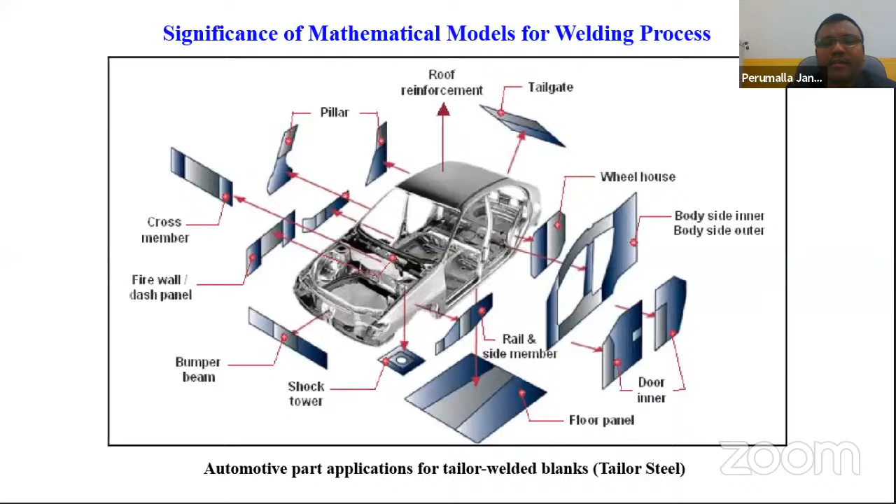You need not think too much about mathematical modeling, but when you go for such advanced level processes and directly implement your ideas onto the product without proper scientific justification, what type of problems can be seen? The history will tell you the reason behind mathematical modeling.

This happened in 1943, relating to what we now call finite element modeling or mathematical modeling techniques. At that time, mathematical modeling existed, but they didn't know how to apply it to the manufacturing process. Every technology - at that time mathematics was already very vast, and non-linear models had been developed, but people didn't know how to use them.

Such a huge mass body has been broken at the welded joint. In such a case, just imagine the loss occurred for a particular government or particular country.

When it came to an incident in India, because of a thermite weld failure, the entire rail became derailed. You can see how a simple defect created a lot of problems for the entire structure.

So what has to be done? How do we proceed? Whatever predefined models existed, can we use those? Or do we have to develop something new for the problems raised in history? What has to be done and how are we going to solve such problems?

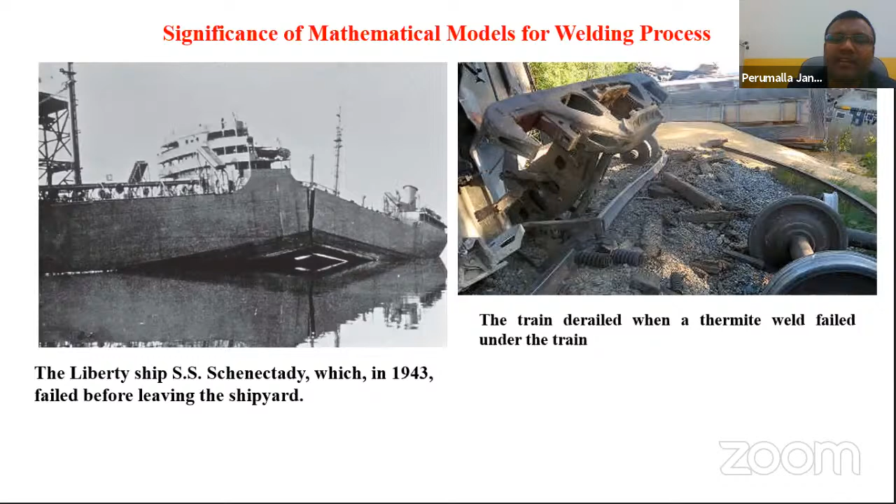For that, mathematical modeling gives you the answer. We cannot say it will remove all the problems that exist in welding or any other process, but it will give you the morale - it will generate confidence in the researcher to explain to the industry person, to take their ideas and implement them into real-time products.

For that, when you are going to develop the mathematical model, you need to think by yourself: what is your objective, what are we going to find, what type of parameters exist, and what model predictions we are going to make, and whether that model is valid or not - that has to be verified in an appropriate manner.

If you see this flow chart, it gives you the complete picture about the principle of mathematical modeling of the process. So you can say objective or system - in that, why you have chosen that objective and what we are going to find from that objective.

For that, what type of model are we going to construct? When you consider a model, the pictures we've seen in the previous slides, the parameters involved in the process have to be identified in a systematic manner. And we need to see which one has more impact during the process.

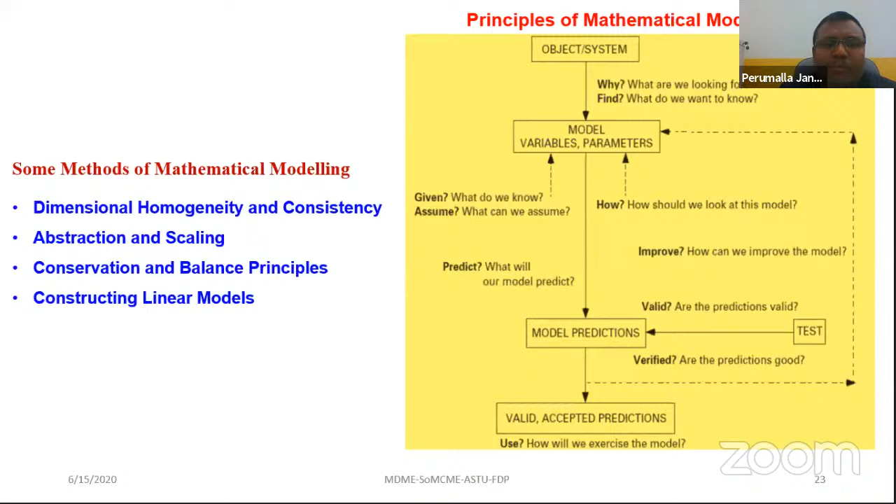Coming to the welding aspect, what we need to observe is the multi-physics involved in the welding process. When going for mathematical modeling of welding, first we need to see the metallurgical analysis, mechanical analysis, then the thermal analysis.

These are the hardcore areas for the welding process as a fundamental engineering aspect. For any mechanical engineer, they will go through metallurgy, mechanical strength of materials, mechanics, and design, along with thermal analysis—thermodynamics, thermal engineering, heat transfer. These fundamental phenomena have to be combined to explain the multi-physics aspect for mathematical development.

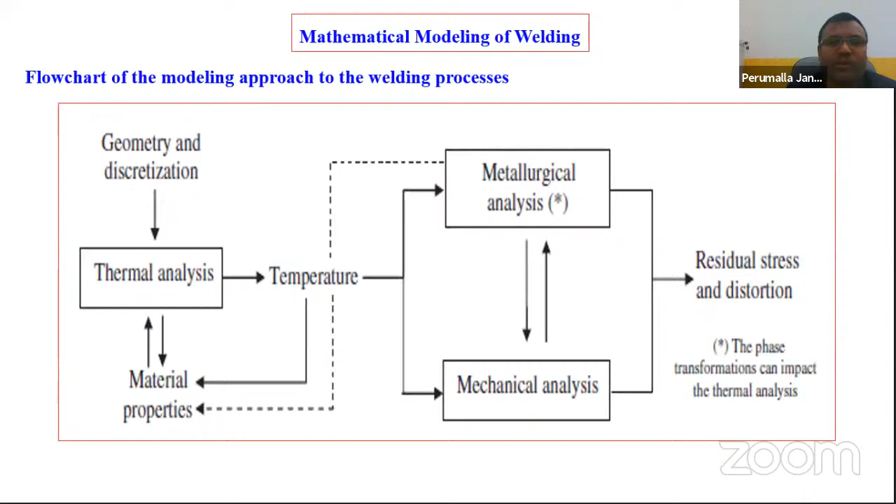So you can further express this—you can simply say the welding process involves thermal, metallurgical, and mechanical interactions during welding.

When you talk about temperature, there will be heat conduction because metal is contacting and heat is being generated. When heat is generated, thermal conductivity principles come in. Not only thermal conduction, but many other principles related to thermal aspects will come.

When it comes to material deformation, because the material is going to melt and elongate, it will deform, reach the fracture level, then drop onto another material. In the solid state, the material flushes and forms the joint. So when it comes to stress analysis, deformation phenomena take place in the material, and the stress-strain relations have to be known.

So the temperature aspect, that will be thermal stresses or heat conduction, whatever. And when it's coming to the stress-strain relations, you need to know the linear elasticity model, linear plasticity model, non-linear elasticity models, non-linear plasticity models, inelastic behavior, and viscoelastic behavior. All these stress analyses will come into the picture, along with the temperature.

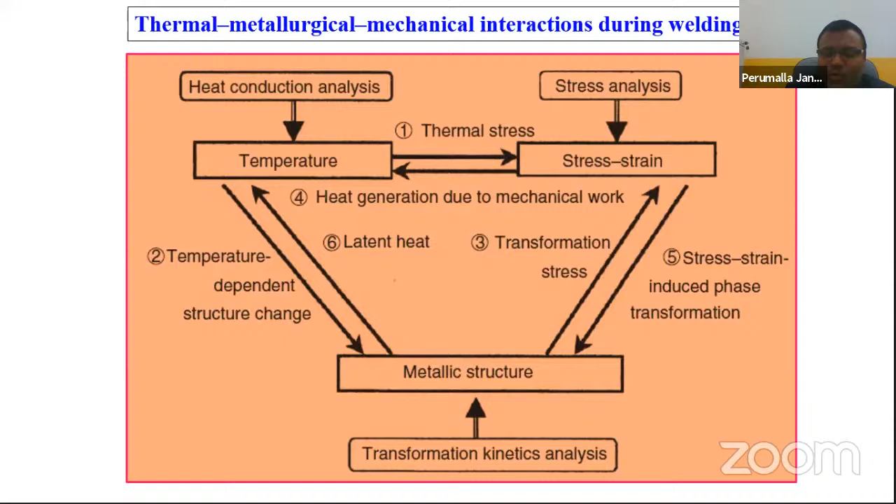And coming to this one, to make you more understandable, we need to see the fundamental diagrams that exist for our metallurgical aspect, like the iron carbide diagram and the time temperature transformation diagram. Both will explain how the molten metal is going to solidify, what type of phases will take place, and at what level of temperature what phase exists.

These relations have to be maintained, because once the heat is given up, we know that steel will melt around 1550 degrees centigrade and give the liquid phase. When it's cooled down, we know that perlitic structure, austenitic structure, ferritic structure, cementite structure, all will come into the picture in this diagram. So this is your fundamental thing.

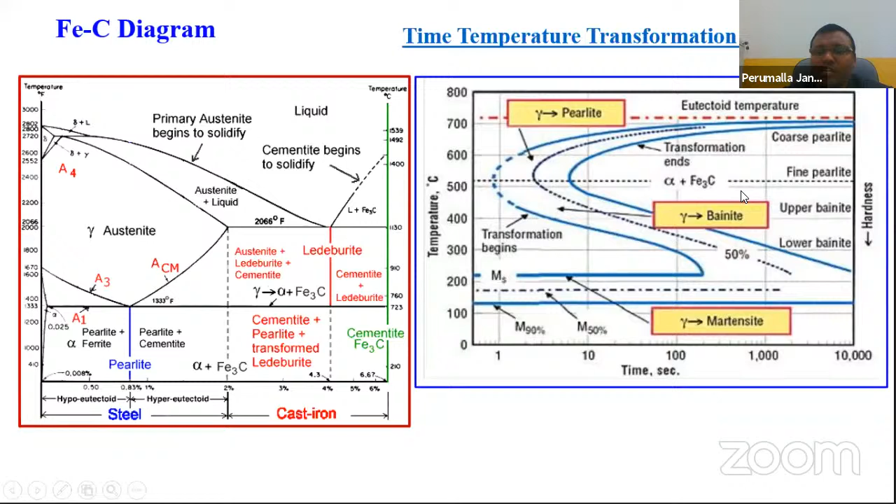So we know when you talk about the microstructure or phase transformation which will happen during the iron carbide diagram or the TTT diagram, so many constituents will be developed during the phase transformation or solidification or any other thing. So when you are going to develop the governing equation, now we have n number of elements, that means n number of phases will be existed, n number of constituents will be there. And then however much volume it has, that volume has to be considered by appropriate functions.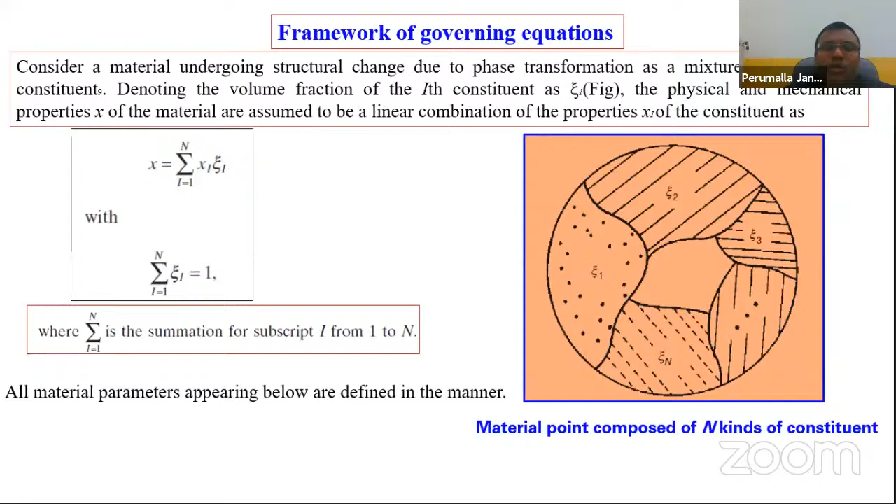We have to use our fundamental expression, which will be 100% used in metallurgy, that is Gibbs free energy. By taking a small equation, we are deriving the three-dimensional aspect and expressing so many parameters involved in that.

Gibbs free energy is the summation of the enthalpy minus temperature into entropy. This gives you how much energy has been utilized for the phase transformation. It's a free energy aspect, where enthalpy explains the energy utilization, the internal energy aspect.

If you want to write this into the three-dimensional aspect in a stress tensor formation, the Gibbs free energy equation can be expressed with internal energy, entropy and temperature, and mass density aspects: internal energy density, temperature and entropy density, and mass density, giving the Gibbs free energy formation.

Internal energy is responsible for the phase change, meaning deformation, phase change, or microstructure change. When it comes to stresses and strains, that completely talks about the shape change of any kind of material. These things can be expressed further by considering all the parameters.

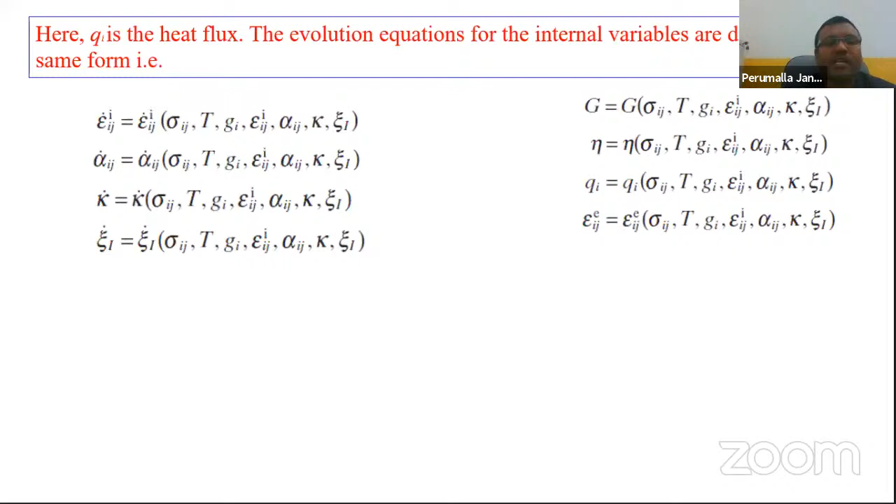When you talk about the conduction aspect, the same equation can further be written, with generation of heat flux also involved. For heat conduction, internal energy, mass density, heat generation and heat flux aspects are considered, and you can express the heat conduction equation by introducing the enthalpy involved.

During solidification or melting, how much energy is consumed can be expressed by the enthalpy aspect. That's how the heat conduction equation is generated for welding of any kind. Thermal analysis and the weld pool give you many parameters, which is what I'm talking about as the multiphysics aspect.

If we are familiar with Fourier's law, the expression can be combined with respect to specific heat, energy, conductivity, heat convection, and whatever external aspects are involved. So we can write the thermal analysis equation for the welding phenomena.

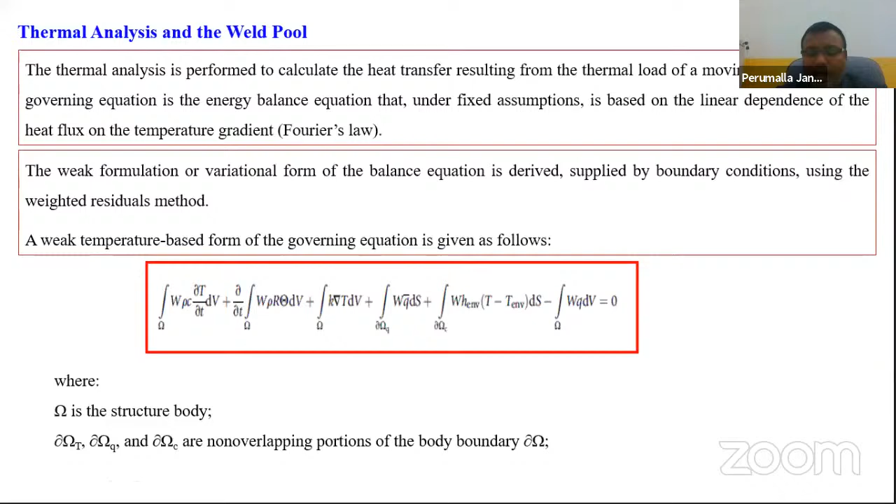Based on your input, your ideas, and material behavior, these equations can be directly used by knowing the material behavior of that particular thing. Also, for the mechanical aspect, how many strains are involved during the welding process, and what type of strains will happen, can be expressed here.

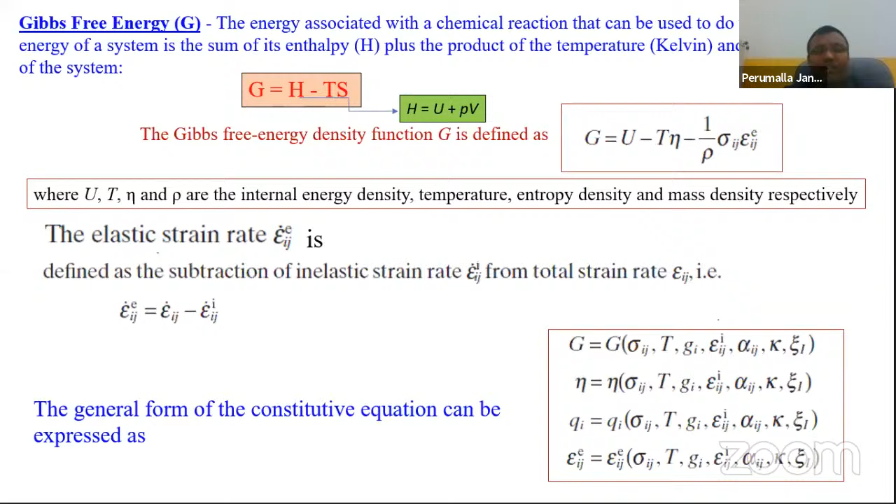The total strain rate can be expressed in terms of the elastic strain, plastic strain, thermal strain, volumetric strain, and transformation strain. Whenever we introduce strain with respect to elastic strain, we have relations between stress and strain in the elastic zone, and relations in the plasticity zone. We have relations with respect to thermal strain, volumetric strain, and transformation strain, but generally the transformation strain will not be considered. So whatever the change in strain, it will be expressed in terms of these four important strains. Combining the thermal aspect, Gibbs energy equations, thermal conductivity, thermal analysis, the mechanical aspect, and the metallurgical aspect, the entire mathematical modeling of welding can be expressed.

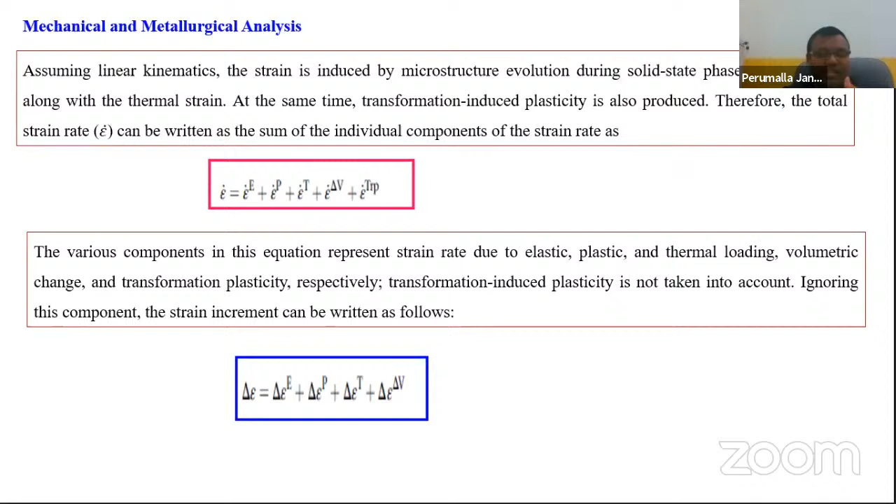Further, based on your knowledge and interest, you can expand these relations and derive the expressions for the mechanical aspect with respect to any welding process. You can write the expressions.

When it comes to the automation aspect, to avoid defects, mathematical modeling has come into picture. From that understanding, developing codes for machinery and automation have come into the picture. This automation involves how adaptive control systems and flexible manufacturing systems can be developed, how simulations and offline programming can be maintained, how integrated automation systems can be implemented, how rapid prototyping can be processed, and how wear replacement can be done. These automations with respect to mathematical modeling can be implemented to evaluate and justify why we need to go for the automation aspect for any kind of welding.

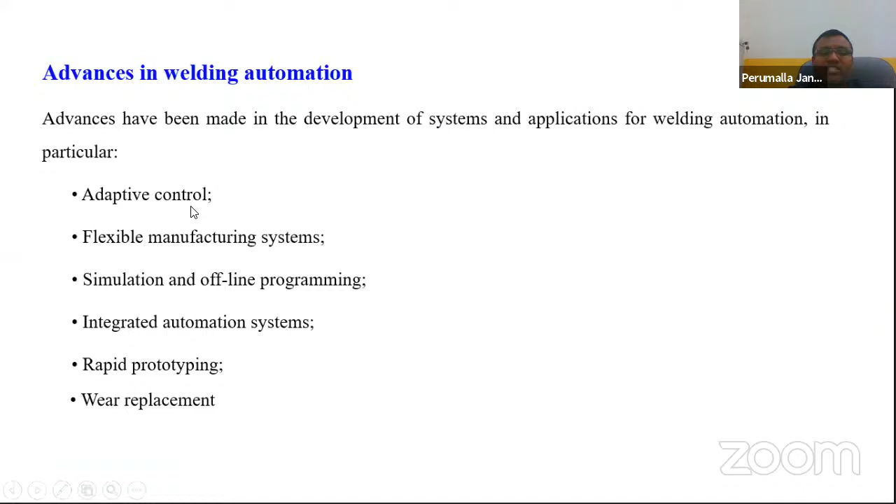This automation is an advanced area of research in the process. Each and every topic will give a research area for new researchers working in welding. Don't think in the conventional manner, the conventional things are already done at a sufficient level. So when moving towards the automation level, we expect researchers to understand how we can adapt the systems, how we can go for the automation aspect, how we can justify the automation for the industrial problem, how we can avoid defects, and how we can improve the life of the product for any automotive industry.

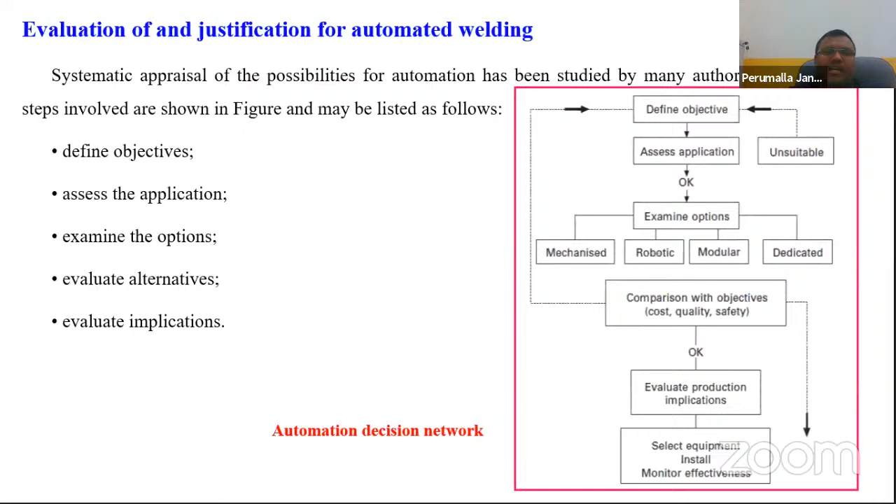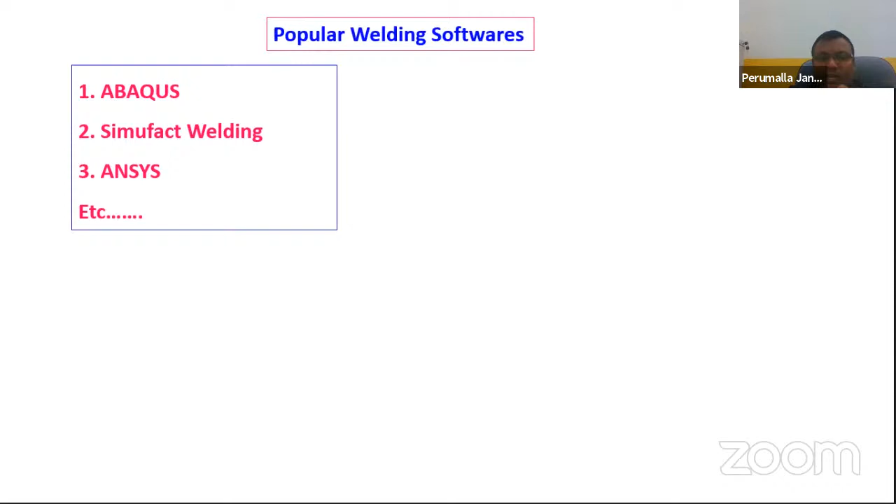Mostly for welding, people use software like Abaqus, Simufact Welding, and ANSYS, and many other softwares are also there. These are commercially available, though some cracked versions are also available. You can learn and practice those and see what is happening, whether the mathematical expressions given in existing literature are working or not. You can check through these softwares. The simulation will give you 90% riskless results for any experimentation. That's how we can proceed for the mathematical aspect of the welding process.

When it comes to the role of manufacturing engineering, being in manufacturing, you must be proud. People think manufacturing is very easy and simple, or that people do it just for the sake of a degree. It's wrong. We know that 60% of income depends on manufacturing industries. Not only for a particular country, but for any kind of country, especially developing countries, manufacturing industries play an important role, whereas for developed countries, the automation level of manufacturing is also an important role.

As a manufacturing specialist and researcher, when choosing a problem related to manufacturing, choose the hot, burning, existing problem and provide a solution for it. Simplify the process and bring the technology to small scale industry level. We need to simplify complicated systems effectively and think ahead about the industry's future and society's environmental impacts. After this pandemic situation, the entire world is going to change, and the manufacturing sector is going to be leading the economy. So we need to be ready for any kind of consequences happening during COVID.

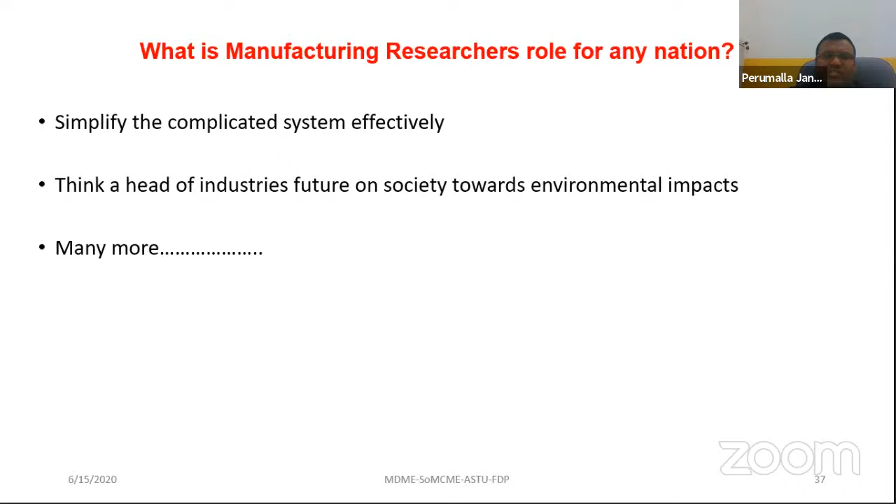Vimana is derived from the Sanskrit word: VI means very high, indicating very high, and mana means a moving object. So something moving with high velocity is called the Vimana. This was there in our mythology, the Pushpaka Vimana, where gods used to travel very quickly and communicate information quickly.

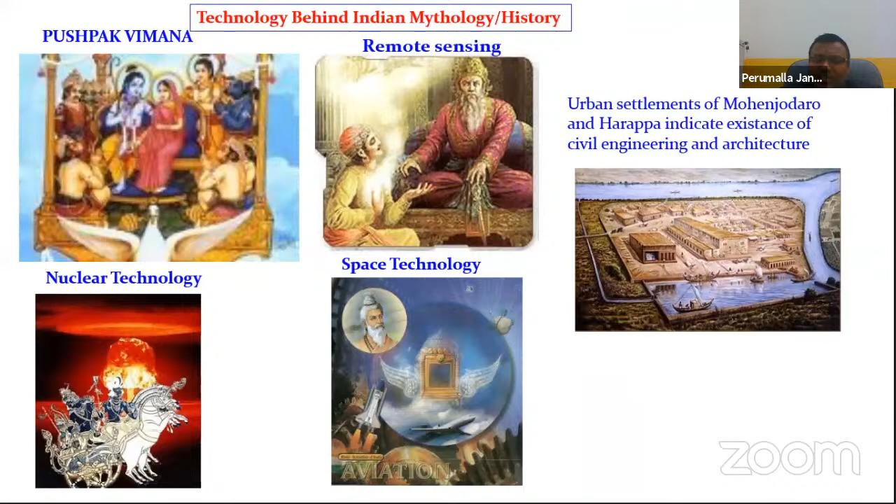Many scientists have indicated India is the origin for the entire culture as well as the entire technology. Without Indians, no technology, no science, no culture - they have told this in so many ways. I have proof for such things, and if you want, I will share it later. Thank you very much.